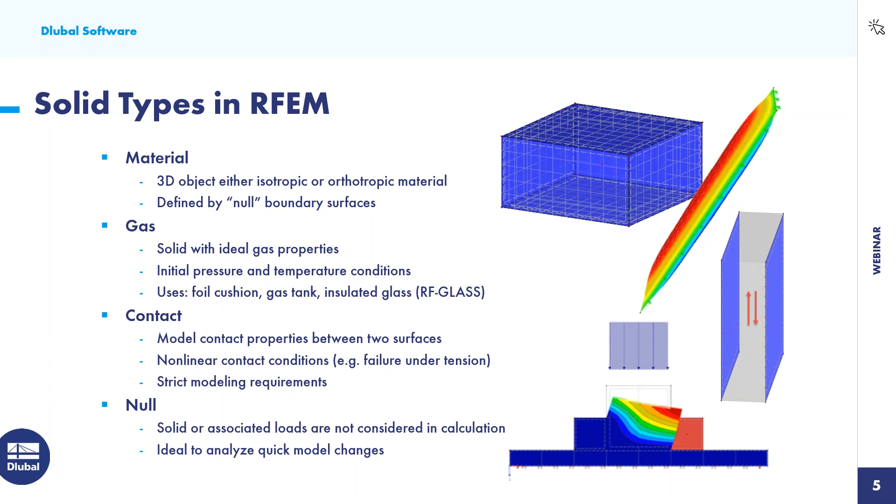The second type is an isotropic nonlinear elastic. Again, you would need RF Mat NL for this material model. This same stress-strain relationship applies for both the unloading and the loading phase for the material. No permanent plastic distortion will occur, though.

Then we also have the isotropic plastic material model. This is where elastic and plastic zones are defined, and the calculation will be carried out iteratively and with multiple load increments. Essentially with this model, if a yield stress is exceeded on a particular finite element mesh point, the modulus of elasticity is immediately reduced. The calculation is rerun until we have full load distribution on the entire structure.

Then we also have orthotropic elastic. This allows us to define elastic stiffnesses separately in all three directions. We might want to use this material model for something like wood or timber.

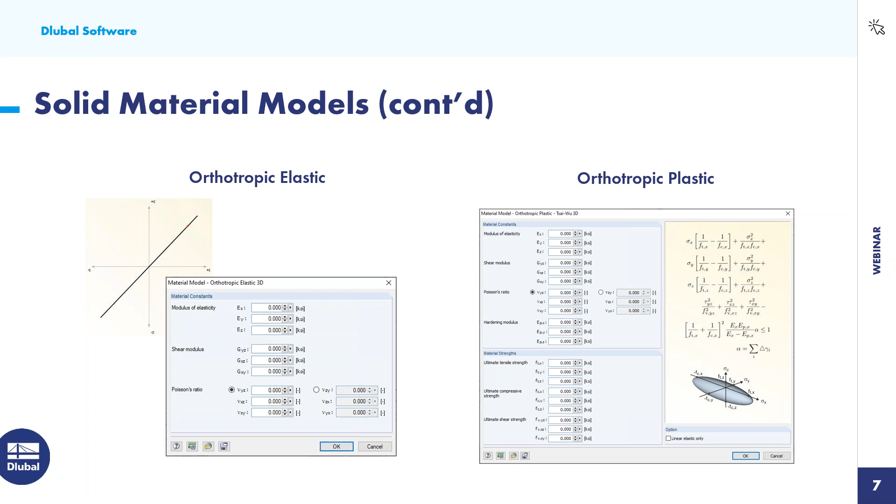Over on the right, we have orthotropic plastic. This utilizes the Tsai-Wu failure theory, and it allows for both plastic and orthotropic properties to be defined in three directions.

All right, so now that we have covered the different solid types and material models, I would like to get started with our first example here within RFEM.

You'll notice that I have a series of line and node elements here, and this model actually comes to us from the firm GP Joule Canada out of Toronto. They use this type of connection here for their solar racking products, and they delivered this file to me as an IGES.

So what I did was File Import. You can see here that we have many different file extensions that we can import directly into the model. We also have some direct interfaces with Tekla, Revit, AutoCAD. These are all default within the main program.

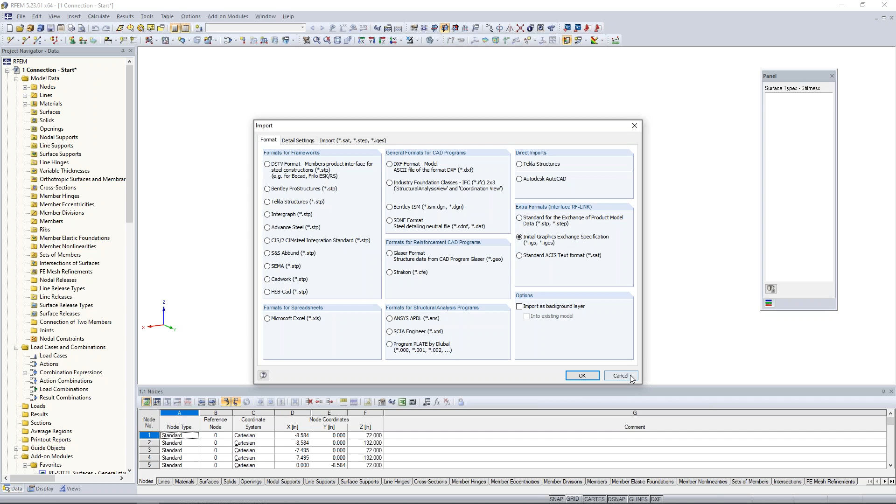If you are trying to import an STP file, a step file, or IGES, you will need to utilize the add-on module RF Link. So for today, we're importing this IGES using RF Link, and essentially what will be brought in are a series of line and node elements to help us model these solid elements.

To begin with, we could probably agree that this is a little bit of an odd connection, not really found as standard in a lot of connection design. So this might flag us that we'd want to do finite element analysis with solid elements to view the various stresses and deformations within this model.

So we'll begin by drawing our first solid here. We can see from these vertical lines as well as the circular lines at the top and the bottom that we want to begin with drawing our first pipe solid.

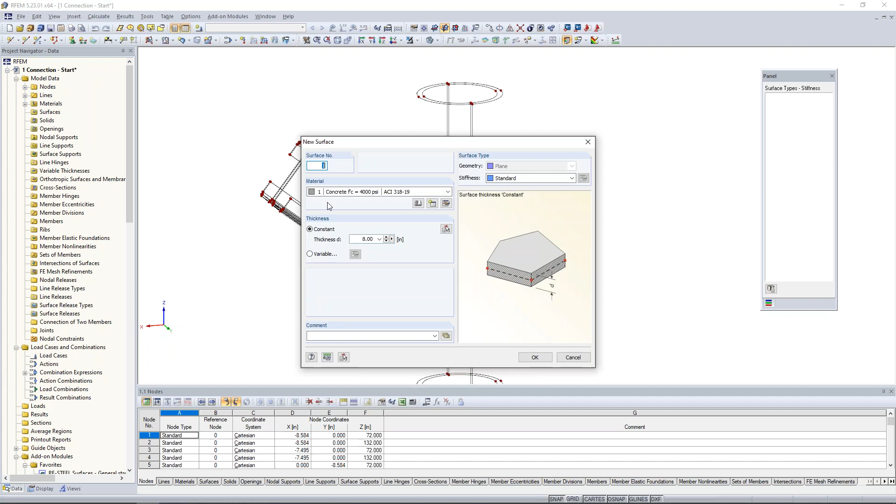I'll go up here to draw a new surface element, and all of these surfaces from this drop down allow us to draw a surface that's in a single plane. We'll choose select boundary lines, and we're going to set the stiffness to null.

If you remember back to the PowerPoint, these null surfaces will define essentially the geometry of what will eventually be a solid element. I click OK, and then I can zoom in here to the top of what will be my pipe element, and I'm just going to select these various line elements here to create my first null surfaces.

Now we'll do the exact same thing on the bottom. I'm just going to zoom in here and select all 4 line elements, and we'll do so on the other side as well. As far as the pipe walls, these are not in a single plane.

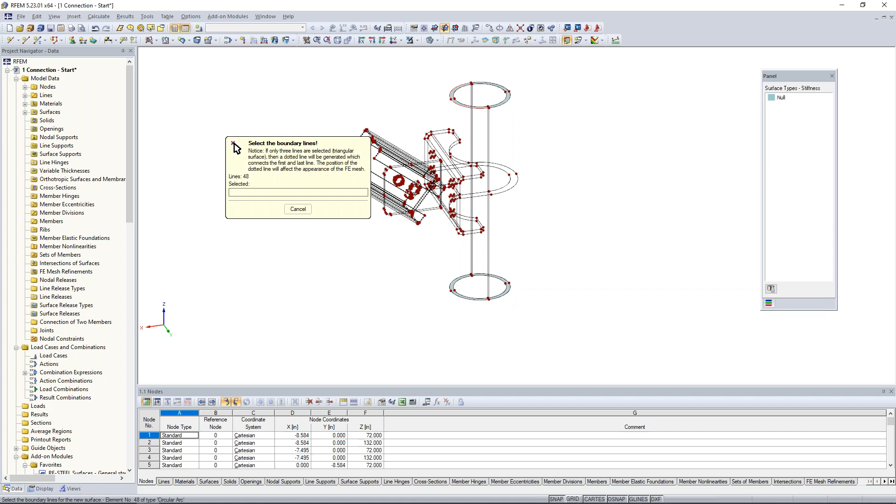So we cannot use this option here to just draw a simple surface, but rather we need to use this tool, a couple over, for a new quadrangle. Now again, the stiffness type is set to null, but this allows us to define surfaces that aren't necessarily in a single plane. So you can see here that I'm going to define my outer wall, and then I'm going to define my inner wall with these 4 simple lines.

Now I can take both of these surfaces here, select them, and utilize my mirror tool.

We can create a copy with the mirror tool. We would mirror about the ZY plane, and then I can simply select any point here within the model that I'd like to mirror about. The coordinates are automatically populated, and now we can see that all of our null surfaces are complete.

So we can define our first solid. Up here in the toolbar, I choose the option New Solid. The solid type will be set to material, so here are those 4 different types we discussed in the PowerPoint. The material will be accessed from the material database.

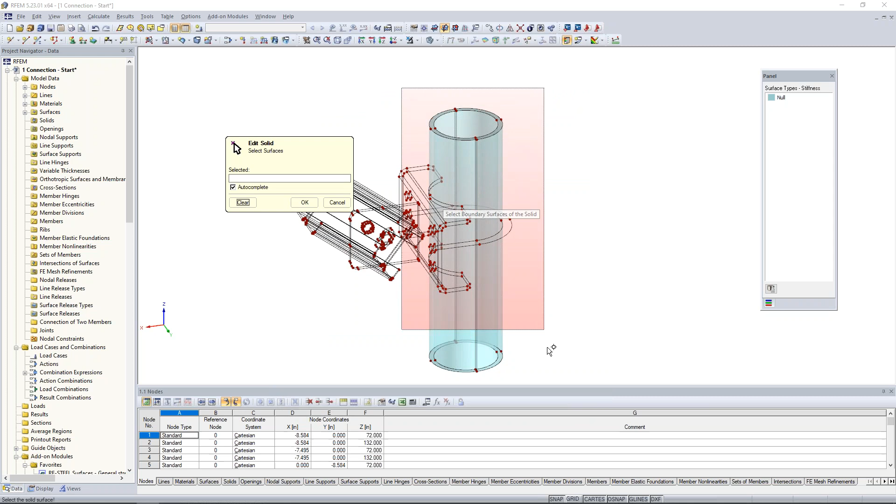I'm going to utilize my filters on the left to choose metal. We'll choose steel, we'll choose ASTM, and we can even take it a step further to choose AISC 360. From here, we would want to choose A53 grade B with the relevant material properties given to us. So I click OK, and then it's really just as easy as graphically selecting these boundary surfaces, surfaces 1 through 8.

Now the other 2 tabs here, the FE mesh allows us to define an FE mesh refinement. We'll actually do this a little bit later on, so we'll leave this unchecked for now. The axes tab will allow us to modify the local axes of the solid. We'll just leave this as the standard default.

So when I click OK, what we'll see is our first solid has been defined, and we can select it right here in the center of all of these null surfaces. So that was a fairly easy solid to define, but what we'd like to move on to is maybe a little bit more complex of an example.

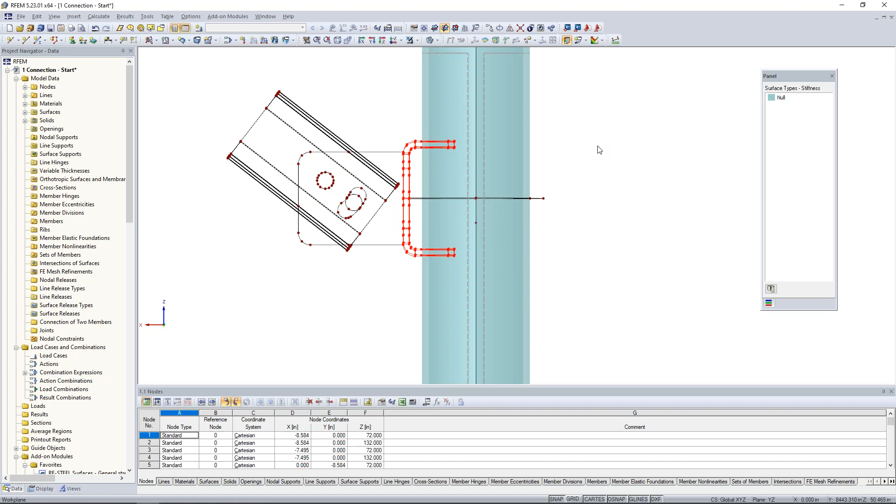So the second solid will be this plate that is essentially resting up against the face of this pipe element. I'm going to select all of my nodes and my lines, and we'll begin by generating those same null surfaces. So I go to my surface option here to select the boundary lines. The stiffness is still set to null. I click OK, and this allows me to move around the model in a circular fashion, and we can rotate the model to generate our first null surface.

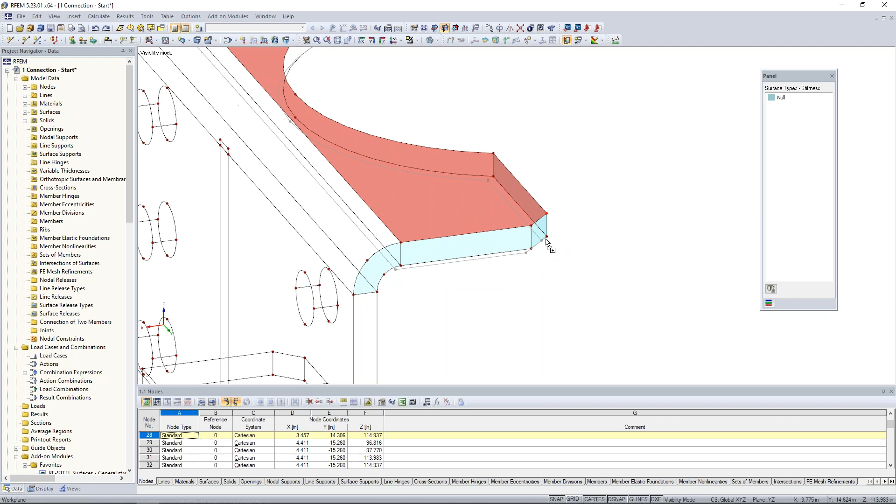And we are done. So this top surface, I need to copy it down to my bottom. So I will highlight it, hold down my control key, and then I can just drag and drop and make a copy. And you can see I'm slightly off there. No worries, we'll hit undo. Can zoom in here, drag and drop, and let's try and snap that to this point here again. So now we have that null surface shown on the bottom.

Now for these curved surfaces, we need to go back to that quadrangle. So I'll choose the quadrangle option here within my toolbar, and then I can easily select the 4 lines to create that first curved surface. And we're also going to do the same thing where our plate transitions from these horizontal elements to the vertical elements, and we need to do so on the back side as well. So those null surfaces are now complete.

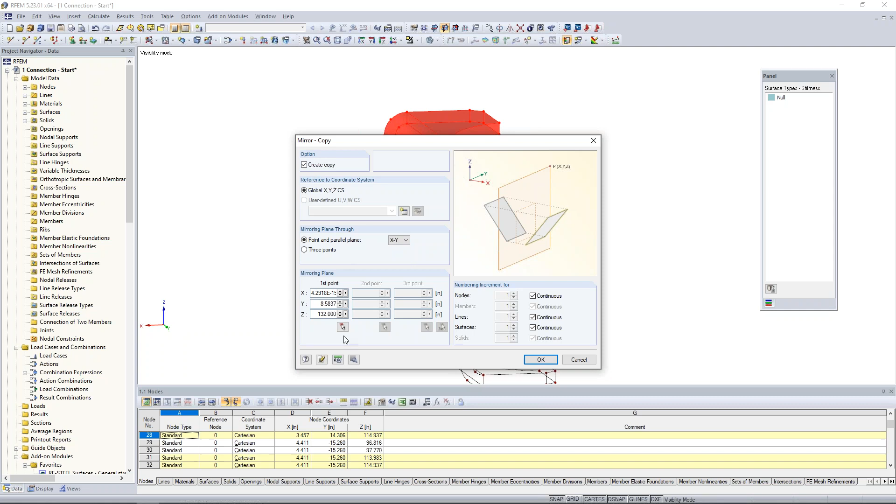Rather than doing that exact same process on the lower half, what I can do is select all of my elements here, and I can once again utilize my mirror tool. We will mirror about the X, Y plane, create a copy, and then I can graphically select my mirroring point. You'll notice the program will snap to one of the midpoints of these vertical lines. So when I click OK, all of those null surfaces are shown at the bottom here as well.

So moving on to the center portion of our steel plate, we can utilize our surfaces in one plane once again, and this is easy enough to select this front face here of my plate element. But you'll also notice that we need to add in some openings. So before I do, let me just add in the side surfaces here.

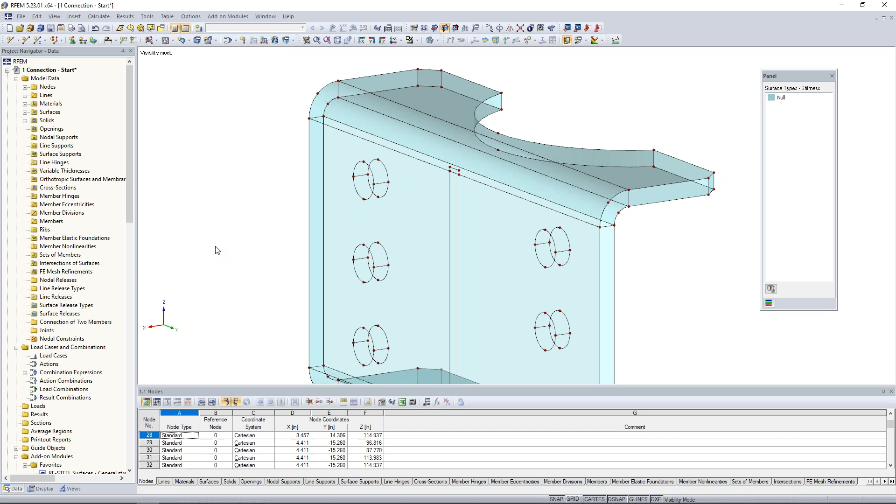To add these openings, we have the option right next to the surfaces to select the boundary lines for an opening as well. So I can easily just select these circular lines, and the program automatically detects that it should add an opening directly within this surface.

So once I have selected all 6 openings for my bolts, I'd like to copy this same surface and the openings to the other side. I'll highlight this surface, then hold down my control key, and select all of the openings. Here's where we can easily hold down our control key, drag and drop to make a copy on the back side as well. Now you'll notice those openings are also on the back of the plate.

Realistically, we think we should be ready to create that second solid. I'm going to go up here, just like the pipe, to create a new solid. The solid type will be set to material, but let's define a new material from our database. This time we will utilize steel A36.

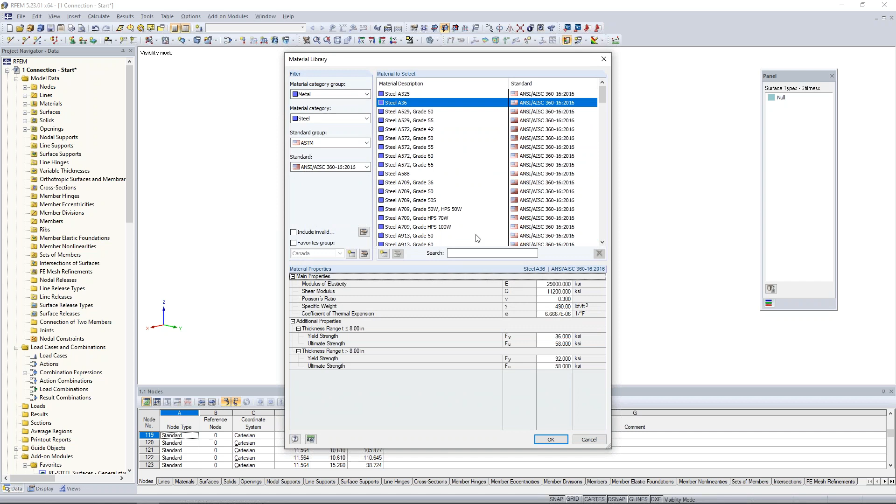I click OK. Now I choose my boundary surfaces, and when I click OK the program automatically gives me a warning saying the surface boundary is not closed at these particular edges. So these are all specific lines. The problem is that we defined these openings, but we didn't close the surfaces here on the interior of the openings. So this would require a new quadrangle surface.

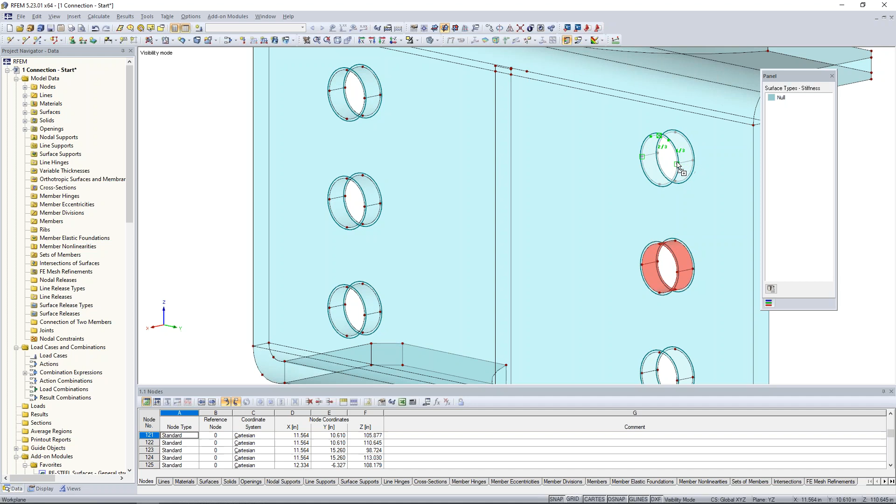We click OK, and we actually need to apply these surfaces on the interior here. Once I apply these 2 surfaces, I have these 2 additional surfaces. I can hold down my control key to drag and drop to these additional openings, and do so on the other side, making sure that our snap points align. Finally, we have one more opening to add here.

The other thing I'm going to do quickly is utilize this tool up here in my toolbar. It's the connect lines or members tool. All that this does is recognize where lines are connecting, nodes are connecting, and we'll go ahead and create an intersecting node there. So let's try and create our solid again.

Solid type material, I'm going to select the steel A36 that I've already defined, and let's select all of our null surfaces here, and click OK. Now you can see that solid was generated just fine once we closed those boundaries, and we have an additional solid shown here.

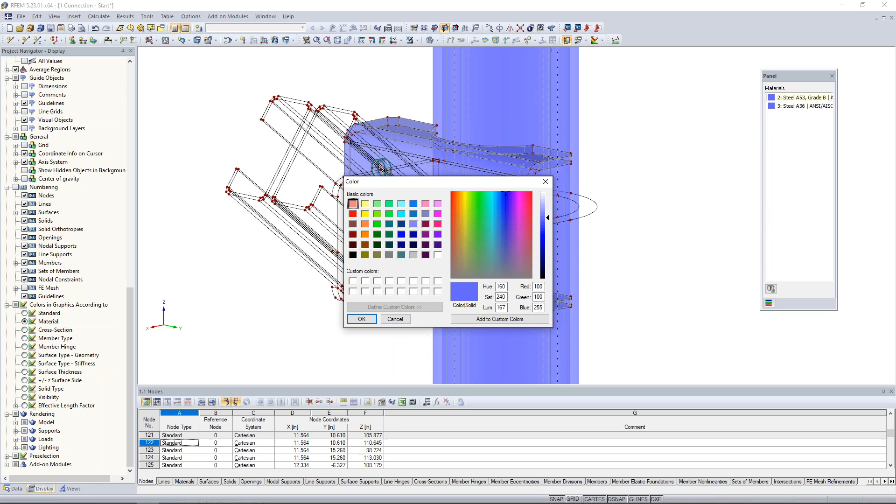So we can cancel this visibility here, and let's take a look at the display of our model according to the material. I'm going to change the color of steel A53 here to a green color just so we can see the difference. Now, here's the problem if we were to continue on modeling the rest of our solids and eventually run an analysis.

If this plate was to press onto this pipe in compression, the plate will actually just pass right through the pipe. The program doesn't detect that these 2 elements are connected, and the reason why is because they do not have a commonly shared surface. So what can we do about this?

I think we can agree the commonly shared surface should be this curved surface here that we created as part of our plate. The reason why the pipe currently does not detect it is just because we need to integrate that surface directly within the solid itself.

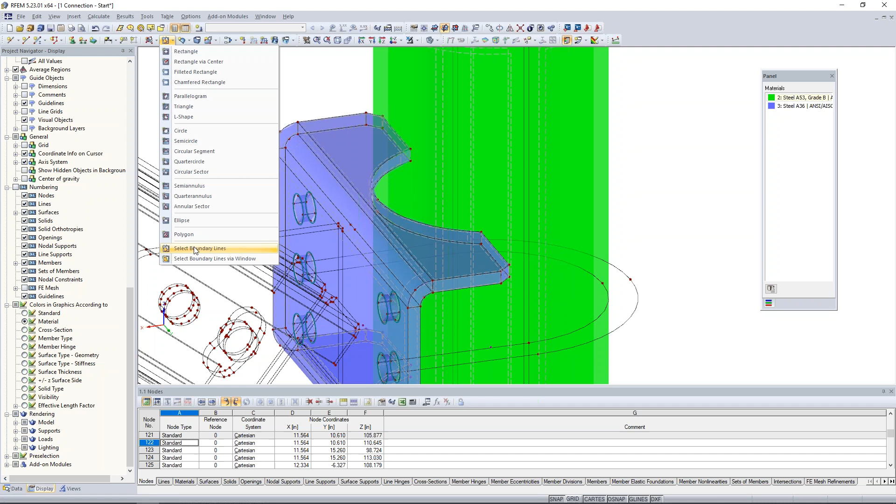So I'll begin by drawing a new opening by selecting the boundary lines. Let me turn this into a wireframe view, and I'm going to select the 4 lines here. I now have an opening symbol shown. Now this surface still exists in the interior of this plate element.

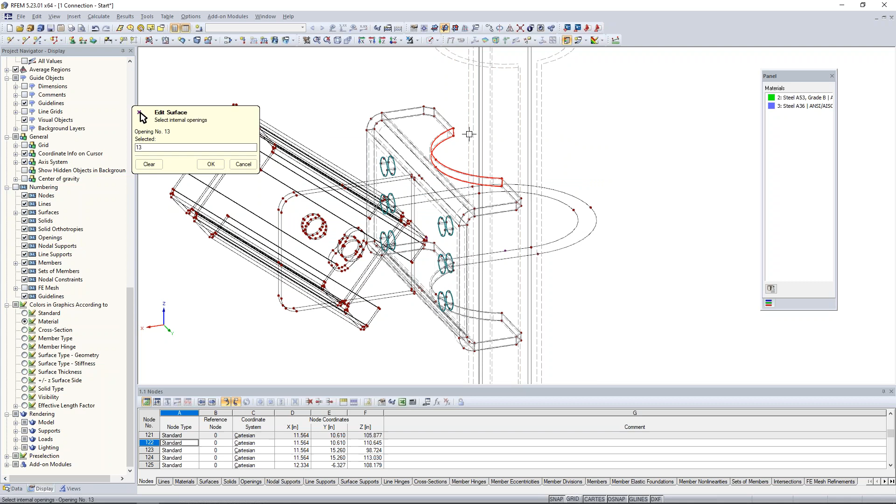So we'll take this a step further, and what we'd like to do is double click - let me back up a step. We'd like to double click on the null surface; remember, this is part of the pipe here. It might be a little easier to see in a rendered view, but we'll change this back to a wireframe view. I'm going to double click on this null surface of the pipe, and under the integrated tab, I need to select this opening and tell the program to integrate this opening directly within this pipe. So we've done that with opening number 13.

Then I'm going to double click on my pipe solid here, and under the boundary surfaces, I want to select that commonly shared curved surface between the plate and the pipe element. Surface number 19 is now listed, so I can click OK.

So now we have integrated that curved surface between both the pipe element and the plate element. So now when they bear on each other, the program will recognize that they're actually connected.

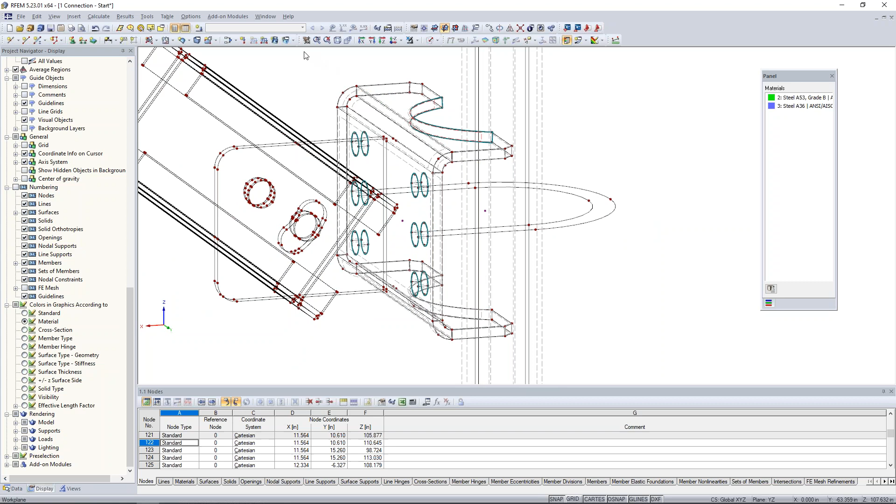We'd also want to do the same thing at the bottom here, and continue on drawing all the rest of our solids. For the sake of time, you'll notice I've continued on with the rest of the model, and I've added in that opening down here at the bottom and integrated that surface to the pipe as well.

We can also access a list of our solids under the Data tab within our Project Navigator. You'll notice I have additional solids now drawn for this U-shaped rod that's essentially tying this plate element around my pipe. We also have the pipe element, and we have the plate that we just created.

Then we have some additional solids, including a solid defined for our bolt on the left. We have maybe a bolt on the right. And then we have some additional solids for the bolts connecting our double channel here to this yellow plate. Eventually this yellow plate connects back to this initial solid that we had just created.

You'll also see that we have solids defined for these channel sections. This is a double channel, representing our diagonal brace in this connection.

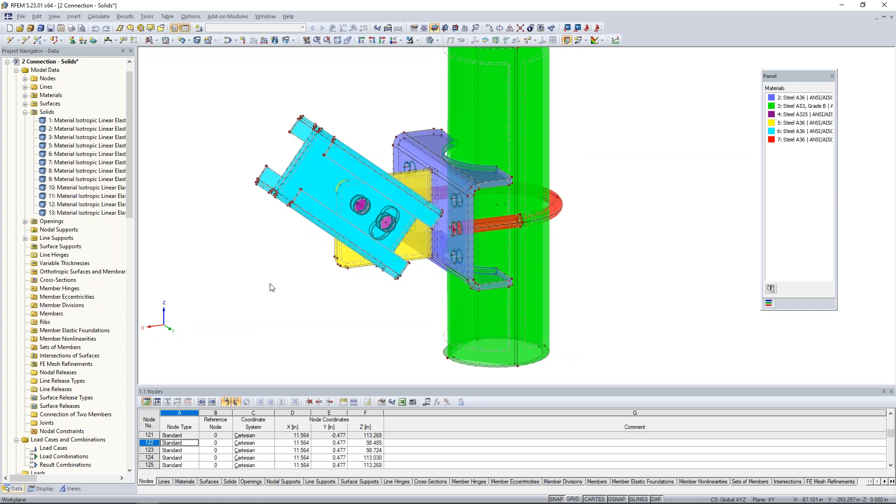So before we're ready to run an analysis, we need to load the structure and we need to support it. Let's begin by supporting it with new line supports. I'm going to access a new line support, and we have a couple default options, both hinged and rigid.

We can always create a new line support, which allows us to define any of the 6 degrees of freedom as fully fixed or fully released. Of course, we have partial fixity and nonlinear options. I'm just going to choose the default hinged option.

I click OK, and we will just select the top and bottom of the pipe element here. So now we have a line support at both the interior and the exterior of this pipe. So it's now supported. We'd like to move on to loading.

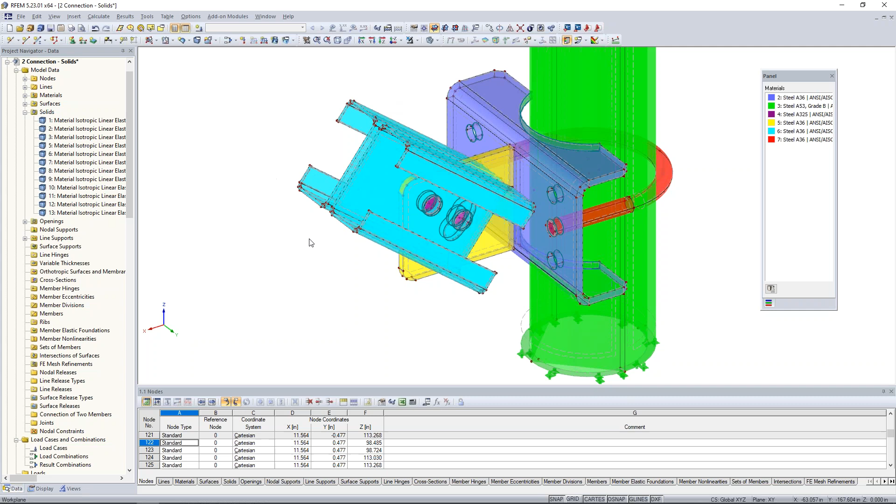With the loading, we probably want to represent some type of load on this diagonal brace, and it's most likely easiest to just simply apply a nodal load. But the problem is that we have all of these null surfaces here. We'd like a point load to really distribute it evenly across this entire face. So how do we do that?

I'm going to select all of these surfaces down here at the end, and I'll create a visibility by the selected objects. Right now, all of these surfaces, if we were to highlight them, we can right-click to edit the surface, and we're actually going to change these from null to rigid stiffness - a very high stiffness, so that eventually when we apply a single point load, it will be distributed evenly across these entire faces. So I click OK here.

But we need to take this a little bit further and actually connect these two faces here as well. So I'll draw an additional rigid surface element between these two channel sections. I'm going to use a new line element, and I'm going to zoom in here to select my point on the left and my point on the right.

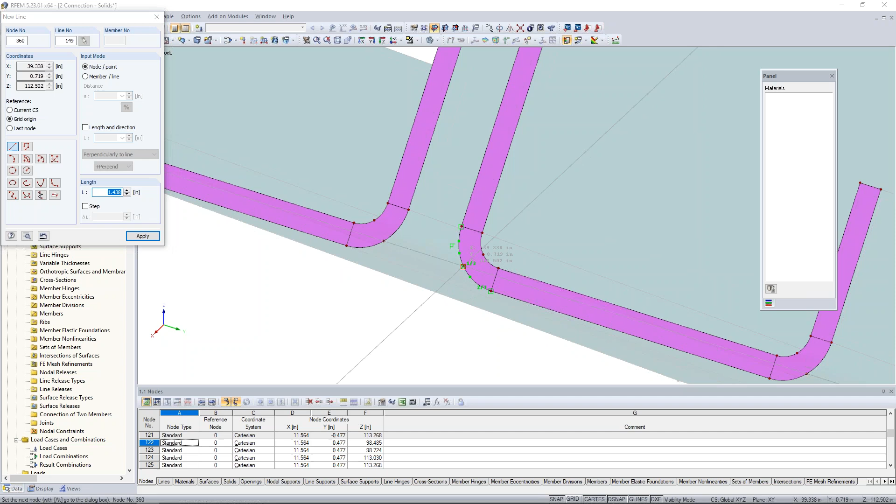We're also going to do the same thing up here at the top. I'm going to select my point on the left and my point on the right. I'm going to utilize this connect lines or members tool once again, just so the program detects where these lines are intersecting these additional surfaces.

And we once again draw a new surface by selecting the boundary lines, but this time the stiffness will be set to rigid instead of null. I'm just going to move around here by selecting these various nodes that make up the boundaries of this rigid surface. So here we are, rigid surfaces connecting both of these channel sections. Now I'd like to create a node right here in the center.

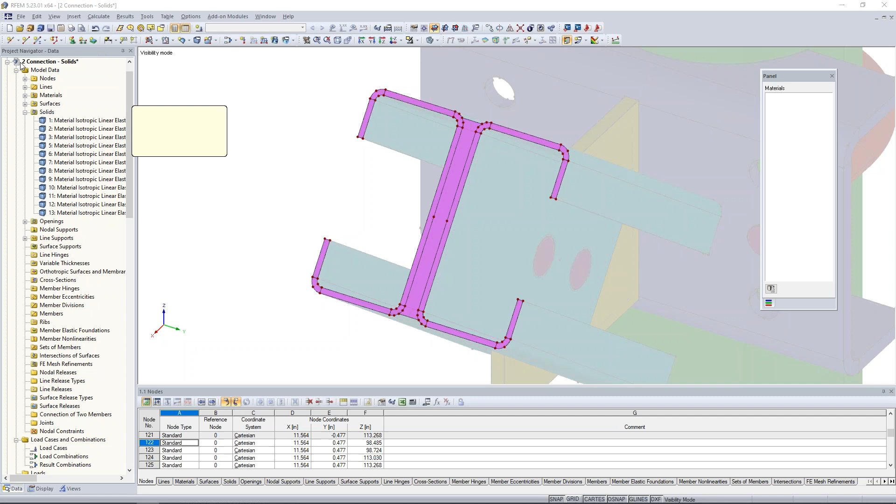So instead of just drawing a new node, we have the ability to draw a node between 2 points. I can select my point on the left, my point on the right, and automatically the program will place a center point here. This is going to be the node that we want to use to load this entire connection.

Before applying a nodal load, we want to generate some load cases. I use this option to create a new load case. The first load case description is 'up', and we're going to place a load that's completely in the vertical direction. Self-weight is activated here. I'll make a copy, and today I'm utilizing load cases rather than load combinations, so I'll activate self-weight since I'm running these separately rather than combining the loads. We'll create one more copy and call this one a tension load.

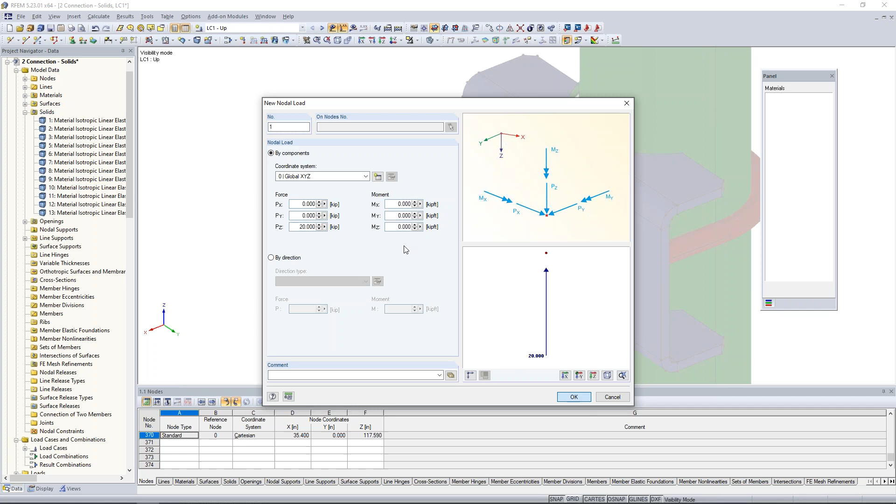Now that we have our load cases defined, I'm going to choose the up direction and apply a new nodal load. Within this dialog box, I'll select the magnitude and enter 20 kips in the vertical global Z direction. I click OK, then zoom in and select the single node, and now we can see our upward load shown here.

Exact same process for down. I'm going to apply a new nodal load. The only thing I want to modify is instead of a positive 20, we apply a negative 20 kips. Just adding a negative sign, we select that center node, and now we have a downward load.

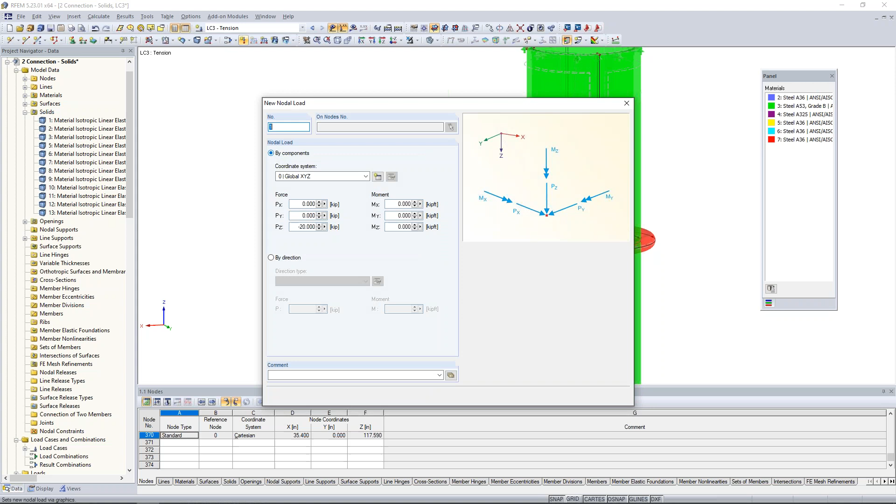For this last load case, this tension load, which is probably the most realistic load, we'd like to apply a tension load along the same orientation as this diagonal brace. When we go to draw a new load, we might think we have to break down this diagonal load into horizontal and vertical components.

But we have a nice feature that allows us to define it by direction. I can go into the detail settings and define this load in the same orientation that a line is defined by selecting it graphically within the model. So I can graphically choose any arbitrary line in the same direction as my member, line 324, and click OK.

I set the magnitude here to be negative 40 kips. I click OK, then scroll in, select that center node again, and now you'll notice we have this diagonal load defined along the length of the diagonal brace. We didn't have to break it up into horizontal and vertical components.

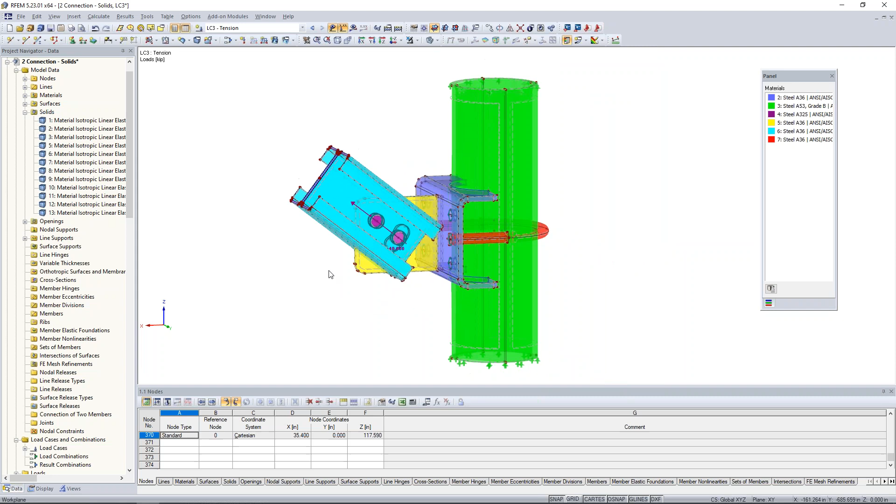We are almost ready to run our calculation. The final thing to discuss is the FE mesh. Under Calculate FE Mesh settings, the default for a new model's global mesh is typically 1 foot, but this is entirely too big for this smaller scale model. So we'd like to change this to 1 inch, and we can select this option to regenerate the FE mesh when we click OK.

We can see in the lower left-hand corner the program thinking through to generate this FE mesh at a 1 inch length. Once completed, the program exits the dialog box, and we can turn on the FE mesh under our display tab. Let's switch to wireframe view, and you'll notice the program has automatically generated this FE mesh, tying all of our nodes and line elements together with the solids. We don't need to take care of anything manually.

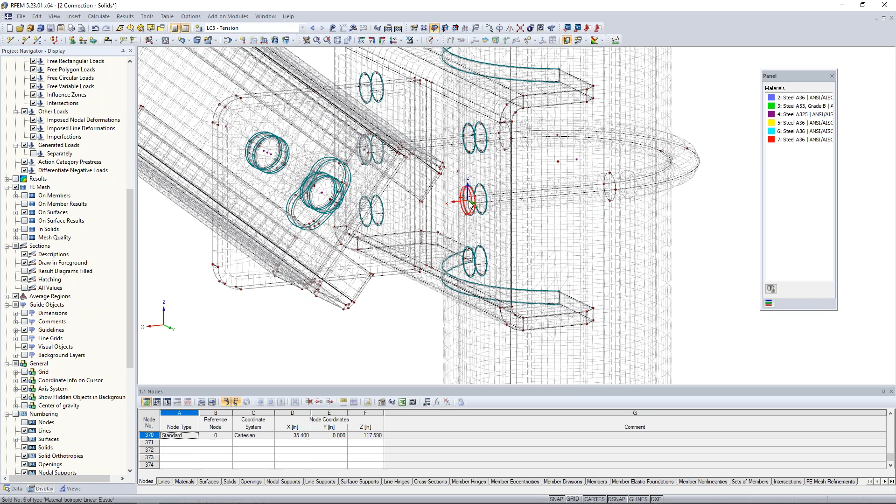Let me take a look at one of these smaller bolt solids, and I'll create a visibility by the selected objects. One thing I notice when zooming in is that there are only 2 FE mesh elements across the entire length. If we're truly interested in the stresses in our bolt elements, we probably want to refine this mesh quite a bit. So I'll cancel visibility mode, and holding down my control key, I can select all of these smaller solid elements.

I'll set my visibility by the selected objects. We can right click to edit the solid, and revisit this FE mesh tab where we can create an FE mesh refinement. A refinement lets me define something smaller than the 1 inch global setting, like 0.3 inches for the entire solid.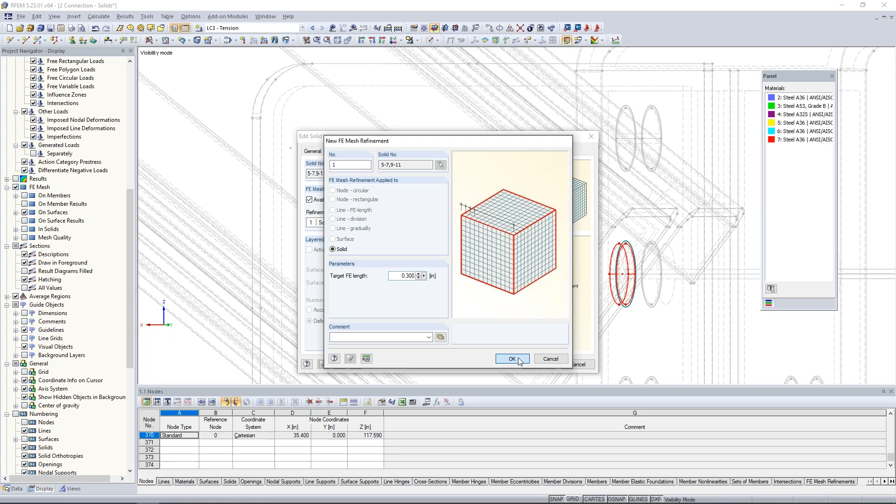In addition to these smaller elements, you can see the FE mesh refinement shown here with this cube type symbol. If I cancel my visibility mode and look back at my pipe element, we can also use FE mesh refinements for larger FE mesh lengths as well. It doesn't necessarily have to refine it into something smaller.

So for this pipe element, I'd actually like to set the target FE length to something like 1.6. This way I'm decreasing my number of mesh elements, which might decrease my solution time as well without compromising my results.

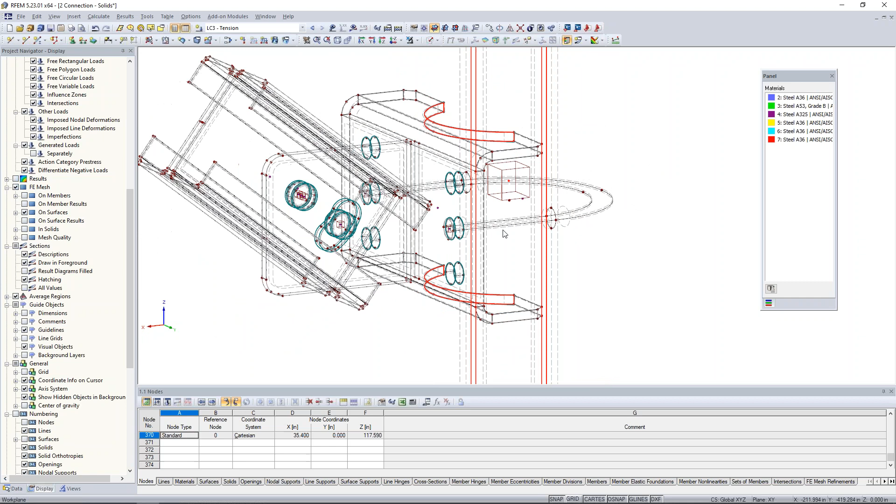If we go to calculate, generate FE mesh, the program will automatically generate this FE mesh again, taking into consideration these FE mesh refinements. It will take just a split second longer because we've defined some smaller FE mesh elements for our bolts, but everything will still tie back into this 1-inch setting.

So here we are with the final FE mesh. We can scroll into these bolts and see there's definitely a smaller length defined. Our pipe has a slightly larger length defined.

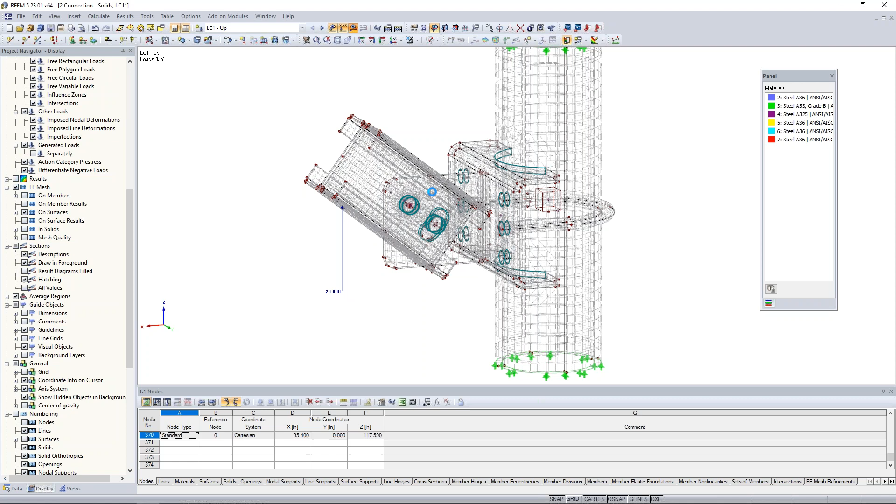Now we're finally ready to run our first load case, and we're actually going to run the load case in the upward direction here. The program gives a quick warning saying you have a lot of FE mesh elements, do you want to change the solver to iterative? I'm actually going to select no with that. This isn't a huge model, so we can keep the default solver as it is.

Now, for this particular load case, everything is linear. Even the load case itself is a linear analysis first order, so it should solve rather quick here and we'll eventually be presented with our results graphically within RFEM. Also, no material nonlinearity shown yet. We'll get into all of those in just a minute.

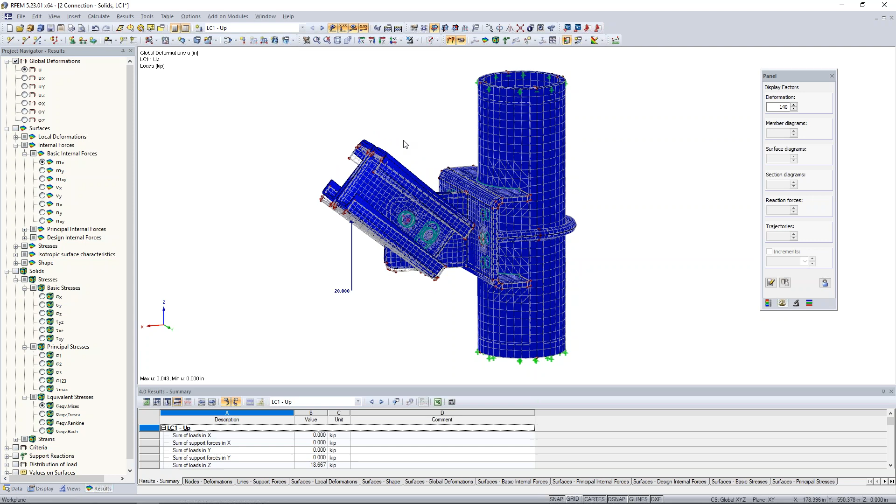Now the calculation is finished, and we're presented with our results here in our project navigator. We're currently viewing the global deformations, and exactly as we would expect, we have our deformation shown here in the upward direction. Sure enough, our braces are deflecting in the vertical direction. But this isn't actually the focus of why I created these upward loads.

I'd rather like to take a look at these elements here, my solids of the plate bearing against the pipe element, as well as the steel rod encompassing the pipe. So I'm going to create a visibility by the selected objects, and right click to turn off the hidden objects in the background. I'd like to still view the global deformation, so I'm going to really increase my deformation factor here.

Obviously we have tension on this plate. And because everything is fully connected here, you'll see this pipe element deformation following along with that plate. Everything is fully fixed. But in reality, we know that this plate is not going to be welded to this pipe. It's actually just sitting there.

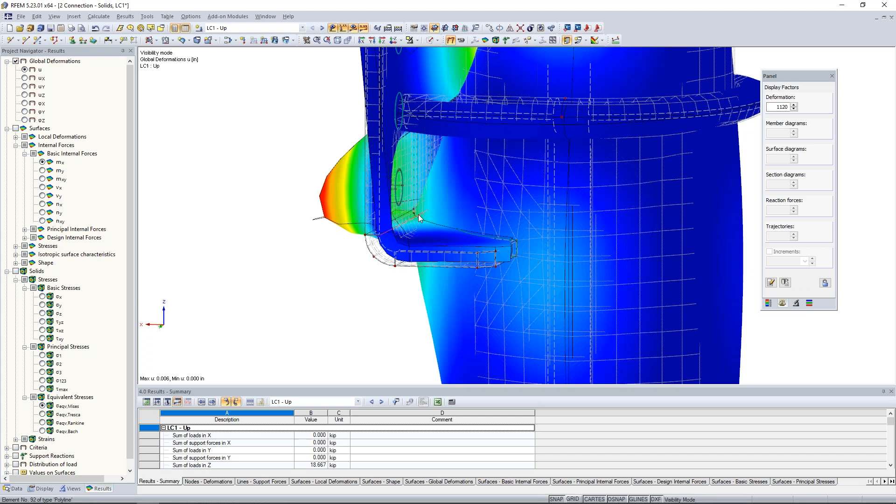So in the event of tension, we'd actually like the full force transmission here to be released. We want this to be a failure between these two elements. But in turn, if we look at the top of the element where we have compression, we certainly want these two elements to bear on one another. We'd like the deflection to follow along with the pipe along with the steel plate. So the question is, how do we define such a nonlinearity as this?

The answer is with what's called a surface release. So what I'm going to do is turn off my results, and under the project navigator, we'll find a new surface release here where we can right click to create a new surface release.

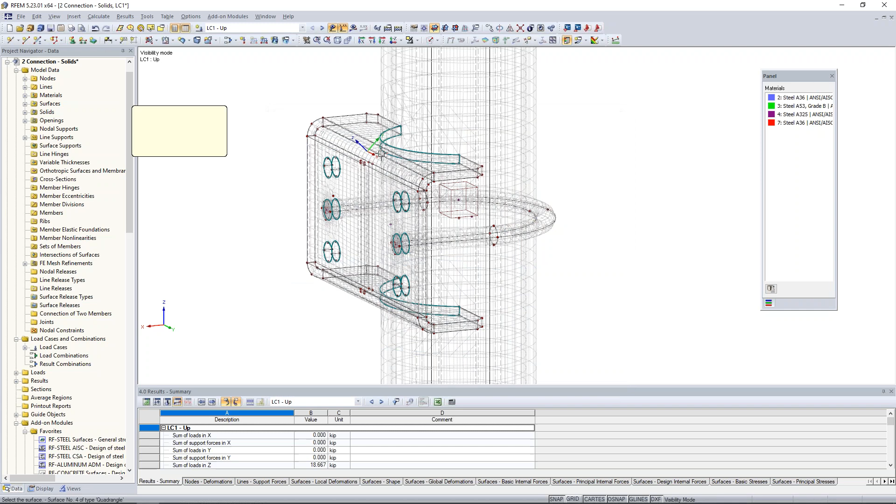The surface we're actually going to use to generate this nonlinearity is that commonly shared curved surface that these two elements share - surface number 15, shown here in the background. We need to create a new surface release type, so I'll create a new type here.

We're going to release the translation in the local z direction of this surface, so it's normal to the face. Under the hood, the program generates a duplicate identical surface, and whatever settings we set, the program will either release the relationship between these surfaces or give full force transmission. In the event of tension we want it to fail, but in compression we want these two surfaces to bear on one another. So we set this to fixed if positive PZ, and click OK.

We want to release solid number 2, and I can graphically select this solid within my model - this is my pipe, solid number 2. I click OK, the program asks me to clear my results, and now we have this surface release symbol shown graphically within the model.

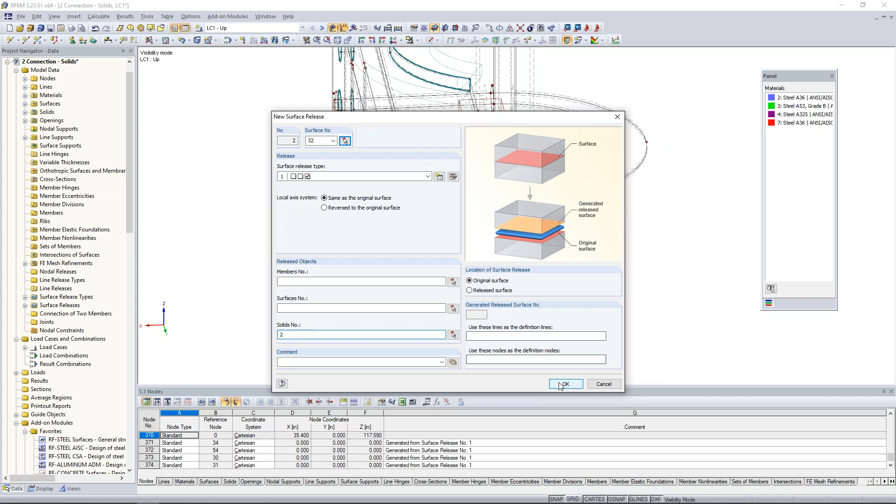The exact same thing needs to be done at the bottom as well, otherwise we have a fully fixed connection. I right click on surface release to create a new one, and graphically select this surface down here, surface number 32. I don't need to redefine the type since we already defined it previously, so I select it from the drop-down box and type in number 2 to release my solid from that surface, then click OK. Now that additional surface release symbol is shown at the bottom as well.

Now what's interesting is to take a look at this line element. If we turn this back to a rendered view, this circular solid rod encompassing this pipe - we know this isn't necessarily a fully fixed connection, but rather maybe we want to define some type of friction behavior between the pipe element and the rod. So I'll create a visibility by the selected objects, and show my hidden objects in the background so we can see where we're at. This line element is shared between this solid rod and this surface, the null surface.

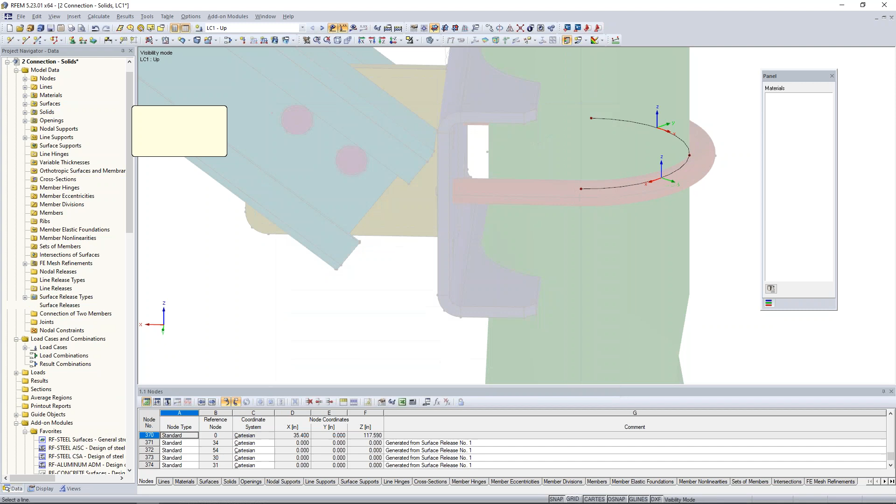I'm going to right click to turn on the local axis system of this line. Just like a surface release, we also have the option to add a new line release from our project navigator - same concept here. We select the line graphically, line number 3, and need to create a new line release type. The program will create a duplicate identical line, and we just need to define the nonlinear behavior here. For this particular option, I'm going to release all of my degrees of freedom.

Notice we have an additional degree of freedom for rotation about the line here. Under my nonlinearities for the local z direction of the line - this is in the vertical direction - I'm going to set the nonlinearity to friction according to the Vy. This means it will take into account the shear force in the y direction, which is essentially the normal force pushing this rod into the pipe.

With this relationship, we can set a spring constant - we'll set this pretty high, 10e6. We also define a friction coefficient between the two elements at 0.8. So the higher the shear force, or normal force acting on this line, the stronger the connection between these two solid elements. Now if we decrease that shear force, that normal force, we're going to see less of a connection, and maybe we'll see that rod slip around the pipe.

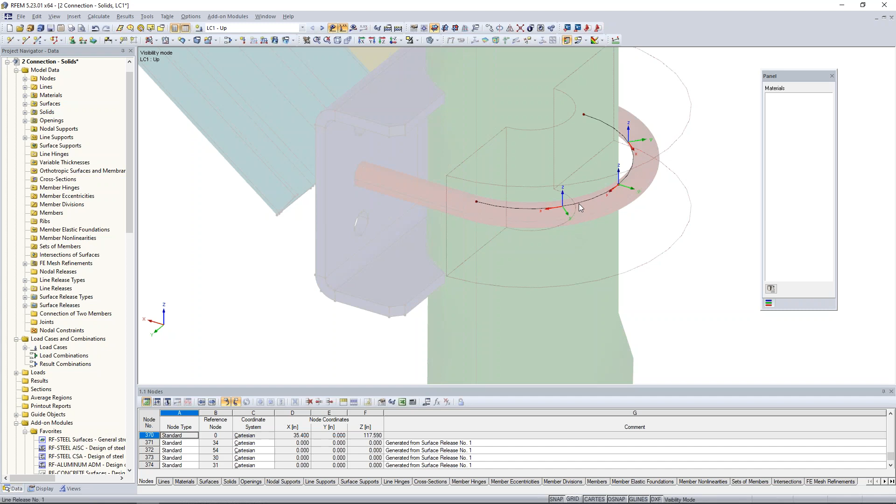Now that we have defined the line release type, we want to release solid number 2. I click OK, and now we have this line release symbol shown graphically, just like with the surface releases.

Canceling this visibility mode, we would now like to rerun this same model in the upward direction, but now accounting for these nonlinearities. For the sake of time, I have actually run all 3 load cases and have the results so we can view the deformation. I'll begin with the overall deformation of the structure with this upward load applied - exactly as we would expect, these braces are deflecting in this vertical direction.

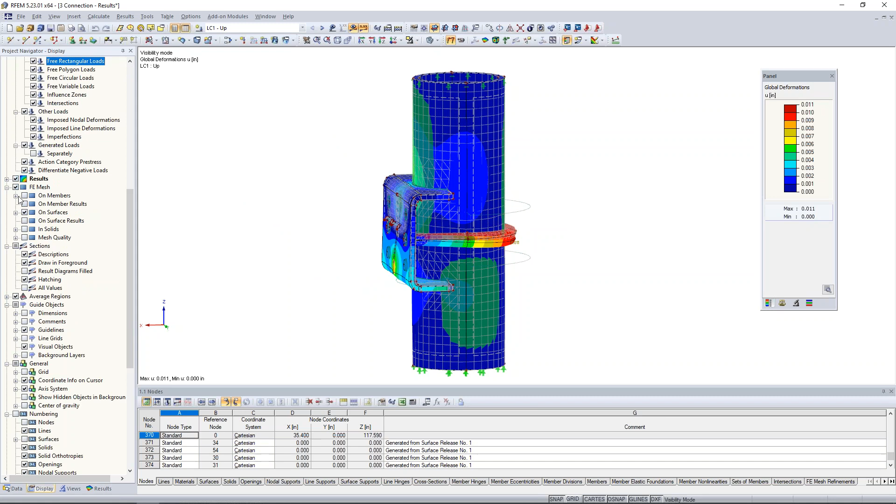What we're more interested in is the behavior we've just redefined on the right-hand side. So I'll select these elements and create a visibility for the selected objects. Under the Display tab, I'm going to turn off my FE mesh, and also completely turn off the underlying model so I'm only viewing the deflected shape.

With the upward direction, I'm going to increase my deformation. Now you can see that as this plate pulls away from the pipe, we actually have a gap here between those two elements. That's because the relationship has failed in tension for that commonly shared surface. But up here at the top, we see the plate bearing into the pipe element, and they're both deflecting together because we have compression. So that's exactly what we'd like to see.

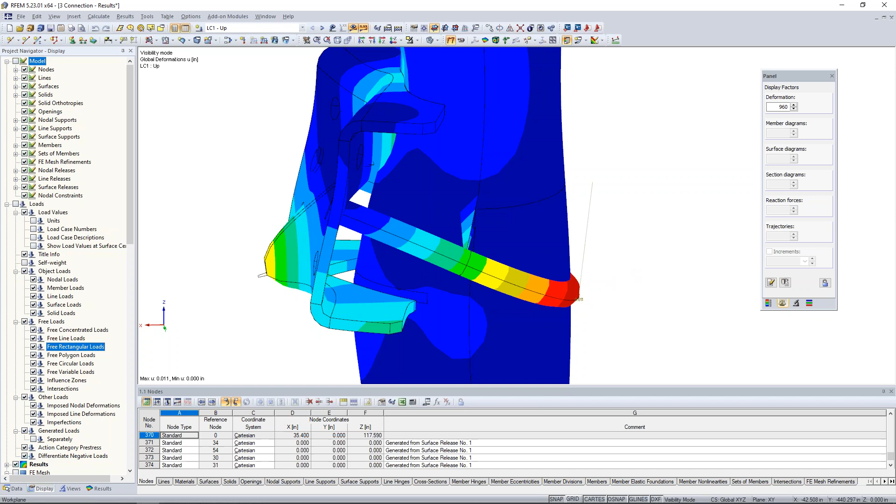You'll also notice my rod is slipping down ever so slightly due to that friction behavior we've defined for that line release. Now my factor is pretty large here - the rod is actually slipping down 0.01 inches, so it's nothing to be too concerned about.

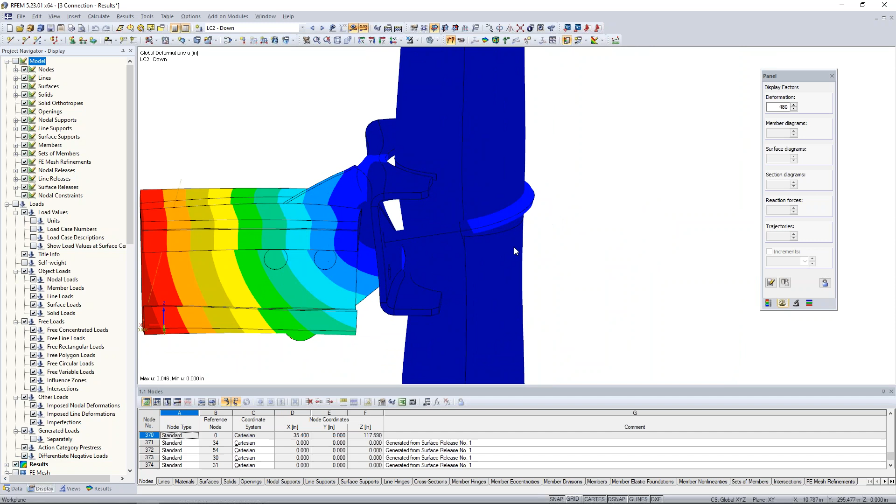If we take a look at the down position - remember, this load is acting down on the braces - I can quickly cancel my visibility mode, and we can see the downward load here. Of course our brace is deflecting in the downward direction. Let's take a look at the deformation factor, and you can see this plate pulling away from this pipe with a small gap in between. We also see this rod slipping up here as well. So this is exactly the behavior we'd like to see defined.

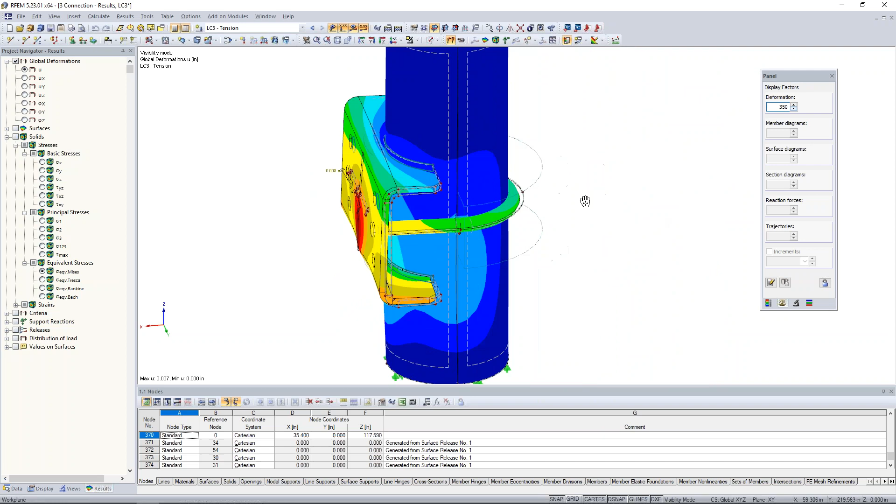Of course, we can take a look at our tension case here. If I cancel the visibility and turn back on my model - remember we just have this load being applied along the same orientation as the members. Taking a look at the results and deformation, I'd like to show you once again what's happening with our relationship here with these elements. You can see that when we turn this into a wireframe view and increase our deformation, we have this plate element pulling away from this pipe. So everything has been correctly defined with these deformations exactly as we would expect - definitely the behavior we'd like to see.

Moving on, the deformation is important to make sure the modeling is acting exactly as we would expect. But we're also interested in information on this model, such as stresses. So I can activate some of my stresses here, such as the normal stresses on my model in both the X and Y directions, as well as the Z direction, because remember, these are three-dimensional elements now.

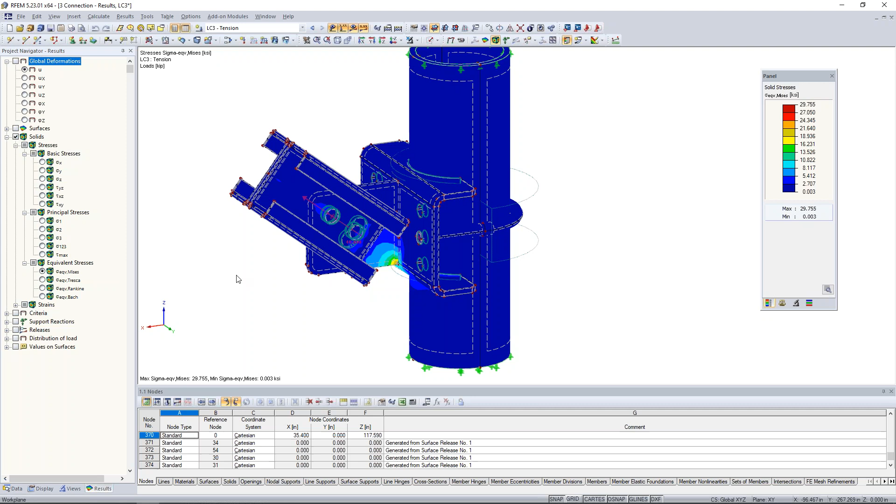We can view the shear forces according to these color panels here. We're probably most interested in the von Mises stresses, so we can activate those and take a view at maybe one of these other load cases, just to see where the hot spots are in this downward load case. Well, we sure have some high stresses here.

Now, a quick tip when we're looking at stresses on a much smaller scale here for something like a connection - you can see the equivalent von Mises stresses are shown at 42 KSI. Under the Display tab, I'd like to activate the FE mesh and take note that under the results here, we have the solids tree. The default is to show the colored contours continuous within the solid, meaning the program creates a smoothing algorithm to tie all the values of our FE mesh points together, giving a nice pretty picture of these various contours.

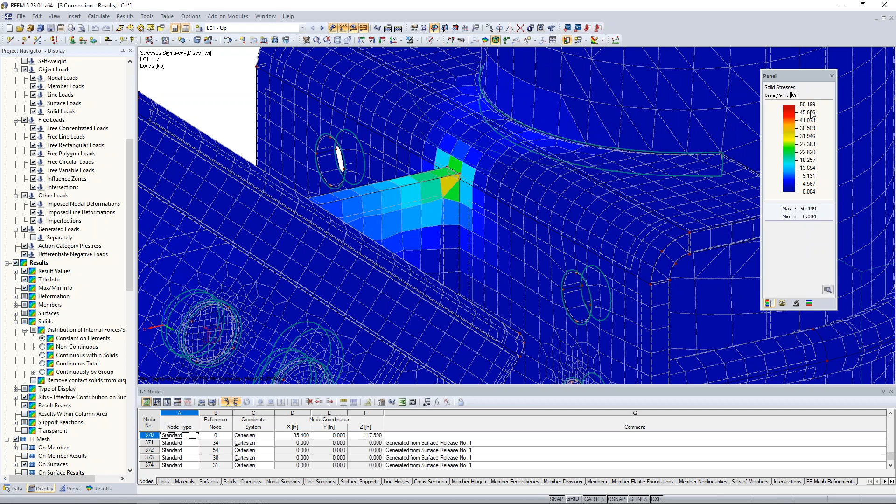The better option when viewing stresses on such a small scale is constant on elements. Now you'll notice every FE mesh element has a specific color - it's no longer trying to tie those all together between each FE mesh element within a single solid. My solid stress actually jumped up to 50.19 KSI. So this is the more accurate way to view these stresses rather than using that smoothing algorithm.

Well, with von Mises stresses this high, I think this would immediately flag us that we probably need to run some type of plastic analysis. Remember, the material for these two plates is A36, so our yield strength is only 36 KSI, yet we have stresses clear up to almost 50.2 KSI. So what we'd like to do now is take advantage of one of those nonlinear material models that we discussed back in the PowerPoint.

Under the Data tab, we can see all of our materials listed within this tree. The first would be the steel A36 from that initial solid we defined at the beginning of the presentation. If I double click on this material, you can see the material model by default is set to linear elastic, and this is where we're going to change it to isotropic plastic 3D.

These various material models for the nonlinear options are available with RF-MAT NL, which simply releases these material models into this main program, RFEM. Now you can see the yield strength by default is set to 36 KSI from our A36 material, based on the von Mises strain hypothesis. So we click OK through these dialog boxes.

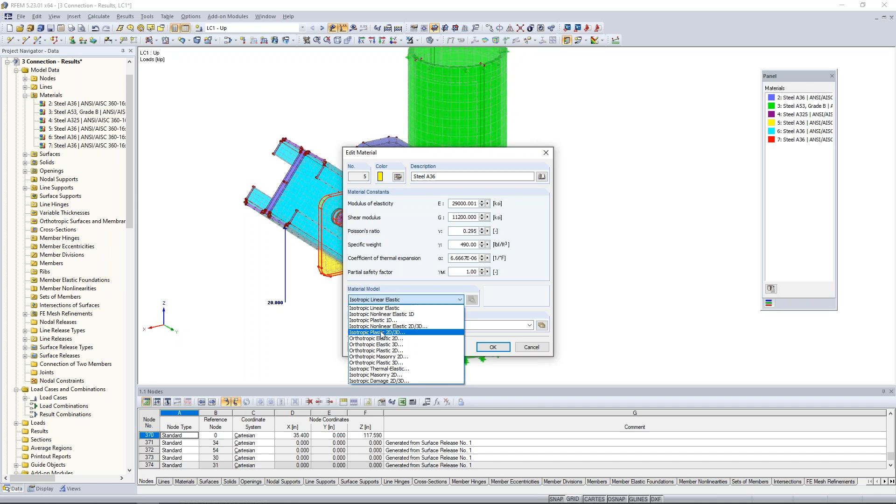The program tells me it needs to clear out the results. That's okay. Now we probably also need to change the material for our additional plate here, since these were both experiencing very high stresses. So I'm going to double click on this material, again steel A36, but we're going to modify this to the plastic 3D option available here.

Yield strength set to 36 KSI, exactly as we would expect. I click OK. Now, realistically, we could change the rest of these materials to a nonlinear material model as well, but the high stresses are really in these two elements, so I'd expect to see better load distribution even with just changing these two elements alone.

So now we'd like to rerun our calculation. And now that we're introducing another nonlinearity, the program takes just a minute to run that calculation. So we will just jump over to an already saved model with the results for us.

So when we run this model according to the nonlinear material, and we also have these nonlinearities defined with the line and surface releases, I want to take a look at my equivalent stresses here again for von Mises. I scroll into these particular areas that I was most concerned about, and I now look at my max solid stress of 34.77 KSI. So this is exactly what we would expect.

We would never want to see with a nonlinear material model anything higher than the yield stress, because what will happen is the load is introduced to these finite element mesh points. If any of them are experiencing stresses higher than the yield strength, the program reduces the modulus of elasticity, distributes the load to the adjacent FE mesh elements, and the calculation is rerun, continuing until the load has been fully distributed within the model.

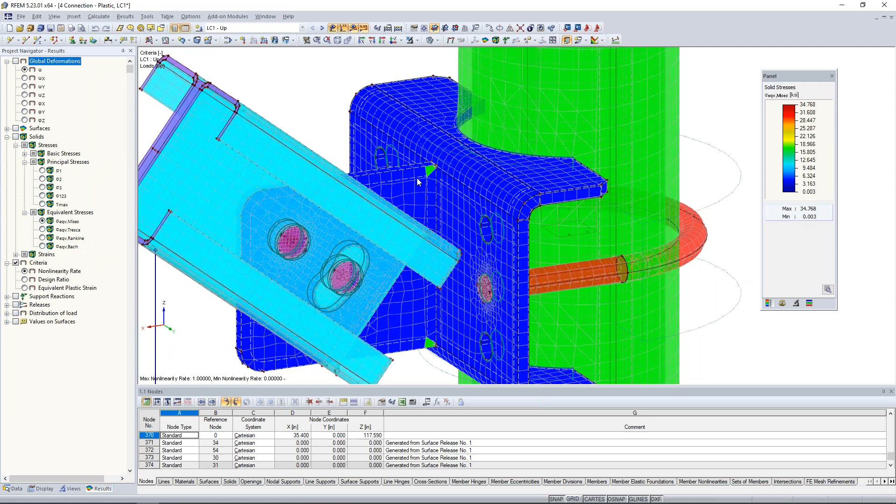So what we're finding here are a few of these elements have probably yielded. And in order to tell if the elements have fully yielded, we can jump to this criteria section here. Turning this back to a wireframe view, the criteria will show us which FE mesh elements have fully yielded or have come very, very close to it.

So with these solid elements, you'll notice it's a little bit difficult to tell what's going on in the interior of these solids. That's because they're three-dimensional, unlike our surfaces or our members. So what I'd suggest when looking at these results is to take advantage of what's called a clipping plane.

Under Insert, we can activate this clipping plane, and it's exactly as it sounds. What it will do is make a slice right through the center of our model here. So we're actually viewing the results right through the center of this plate element, and this just gives us a better idea of which elements may be a concern through the depth of this solid.

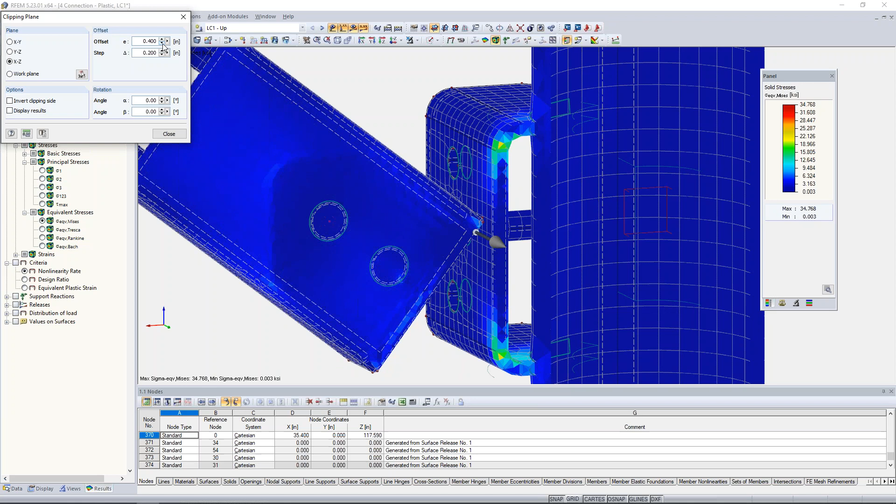We can set our step here to something like 0.2 inches, then use our scroll offset options to scroll through the various views of these solid elements. So I can scroll back to kind of travel through the depths of this plate element. Now we also have the ability to change the plane here, so I can change this to the YZ, and you'll notice I slice through the center of this model.

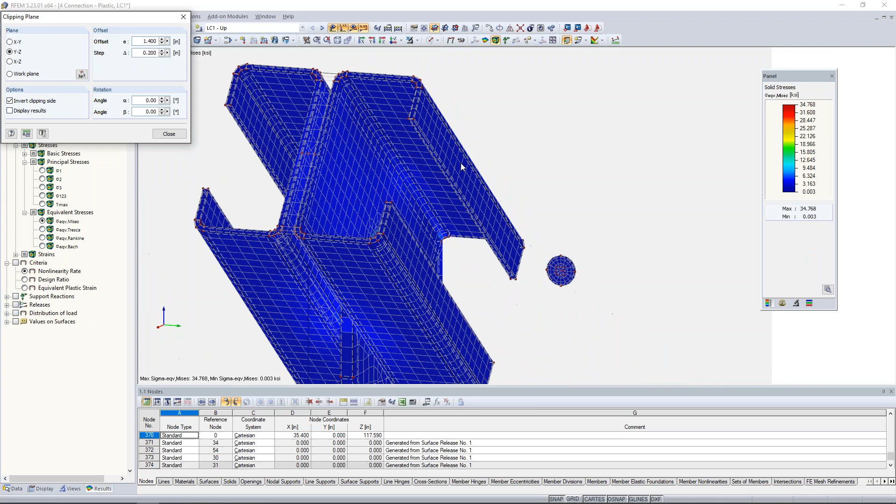I can utilize this scroll wheel here to travel into the depth of where these two solids are connecting essentially. This gives us a better idea using this criteria, the nonlinearity option, of which elements have fully yielded. As we get closer here to our initial plate, we'll see some of those yielded elements. We also have the ability to quickly invert the clipping plane, so when I choose this option, I'm now looking at the other side of the model. We can travel through there with these offset options. That clipping plane can be extremely beneficial when you're utilizing these 3D solids, and it can be a little bit more difficult to see.

Okay, so we have really covered quite a bit in terms of these material solids and nonlinearities. The next thing I'd like to show you is how to activate a null solid. We might think of using a null solid for this particular connection if we're told that this diagonal brace isn't going to be a double channel section, but rather just a single channel, so we'd like to get rid completely of one of these channel elements.

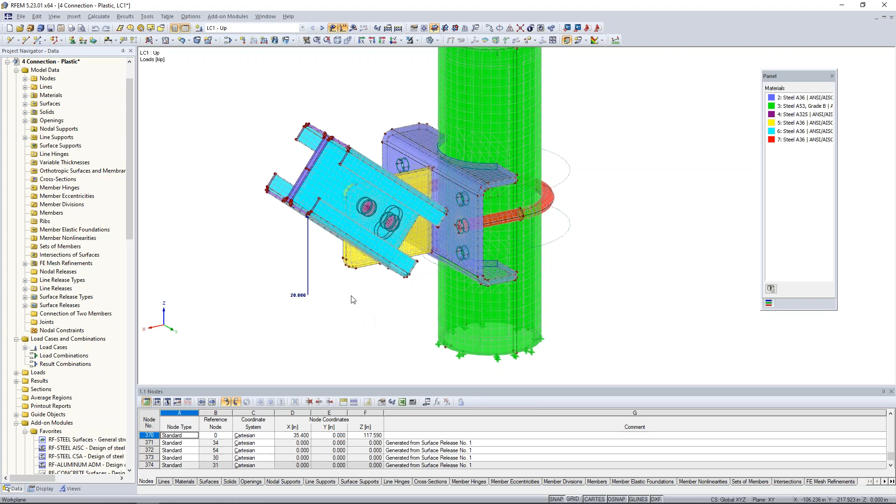Of course, we can go in here and delete the geometry, but instead I'm going to double click on my right solid here and change the solid type to null. I click OK, so we clear our results here, and you'll notice the program automatically modifies the color to this red. That just means this channel was completely taken out of the model, and all associated loads will also be taken out of the model for our next calculation.

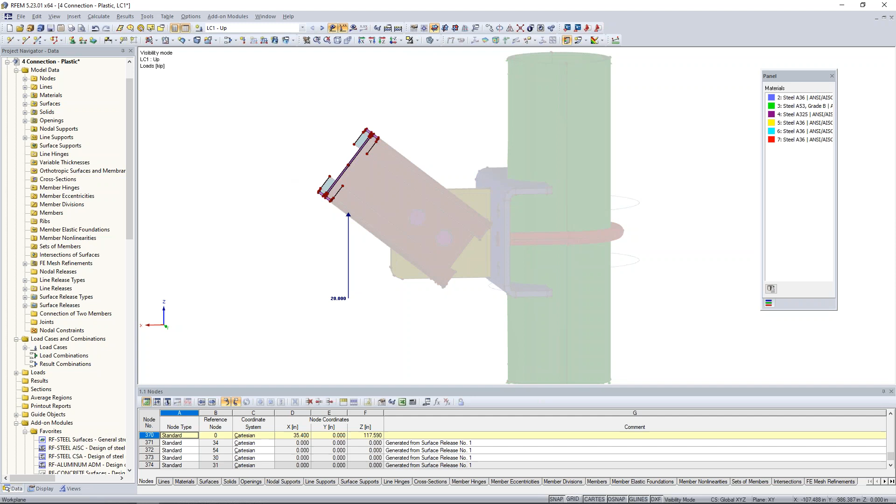Before we run that calculation, we need to modify what's going on at the front here, because we created all those rigid surfaces to distribute the load evenly. So I create a visibility by the selected objects. My rigid surfaces on the right weren't automatically changed to null surfaces either, so we can select them all with our selection tool, right click to edit the surface, and similarly to the solid, we change these rigid surfaces to null. I click OK, so now all of these surfaces and this solid on the right have been completely deactivated.

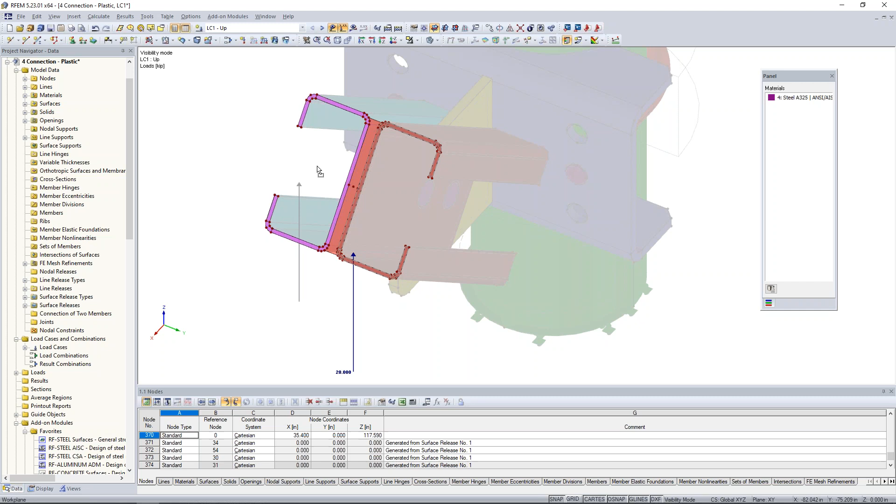The final thing to do is modify where we're applying this load. Currently it's applied to this node that's no longer active on that surface. So let's take this load and simply drag and drop it. Let me zoom in here a little closer. We'll take this load and drag and drop it onto this node on the left, so now it will be evenly distributed to the face of this channel section shown on the left.

Same thing for the downward load. I'm going to zoom in. I can just grab this load here, drag and drop it, and snap it to this new node point. And finally we have this tension load, same concept - I would just drag and drop it to this new node over on the left. So now we're ready to run our analysis again.

Maybe we want to change the materials back to linear, or maybe we keep them as nonlinear, whatever you prefer. So we rerun that calculation, and once again I will jump to an already saved model. Let's take a look at this upward load case and turn on our results. We're currently viewing the global deformations here.

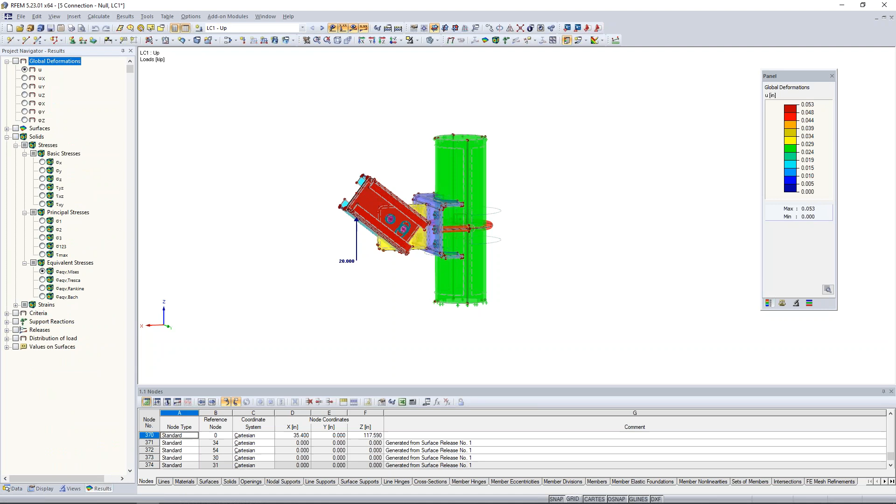Let me turn these on. I will turn off the model in the background completely. And now you can see that although that channel section still exists on the right-hand side, we've set it to null - it's completely taken out of the calculation. We can rerun this entire connection with only a single channel shown.

But in the event we need to reactivate that solid again, all we need to do is change the solid type back to a standard element instead of null, and then maybe modify these loads slightly, and then you can rerun it with the double section shown. So that's a great example of how we can use that null solid option. All right, so that obviously makes up a bulk majority of our example today.

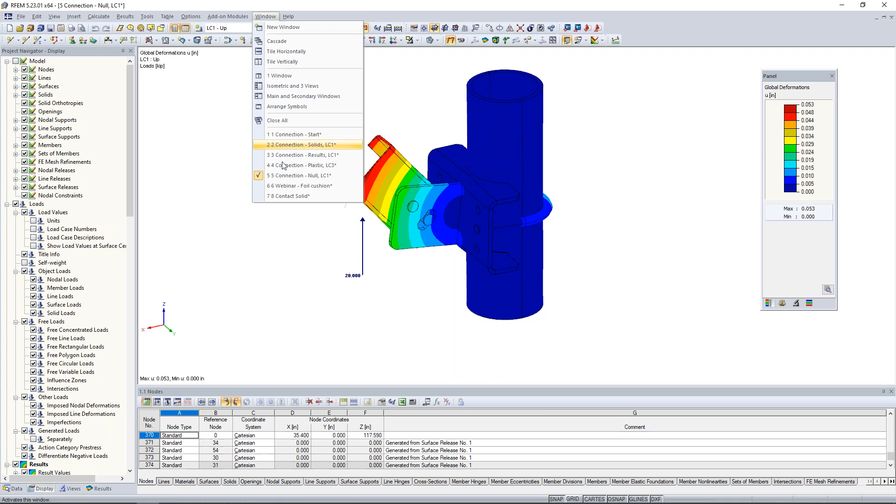I want to touch on a couple of other solid types before the end of the presentation today. We'll jump to another model, an example of a solid gas element. You can see this is an inflated foil cushion, typically used on roof elements. This element is quite large, 40 feet in length and 13 feet in width.

The elements have already been defined here, and I'll preface this by saying one of my colleagues did a webinar completely devoted to this foil cushion and utilizing our form finding add-on module. You can refer to our YouTube channel to view a webinar that goes much more in depth than what I have time to show today.

We have a surface element at the top here, and our stiffness cannot be set to a null stiffness when we're defining a gas solid. The gas must be encompassed by some type of element. So for this, we have a fabric membrane defined with a membrane orthotropic material.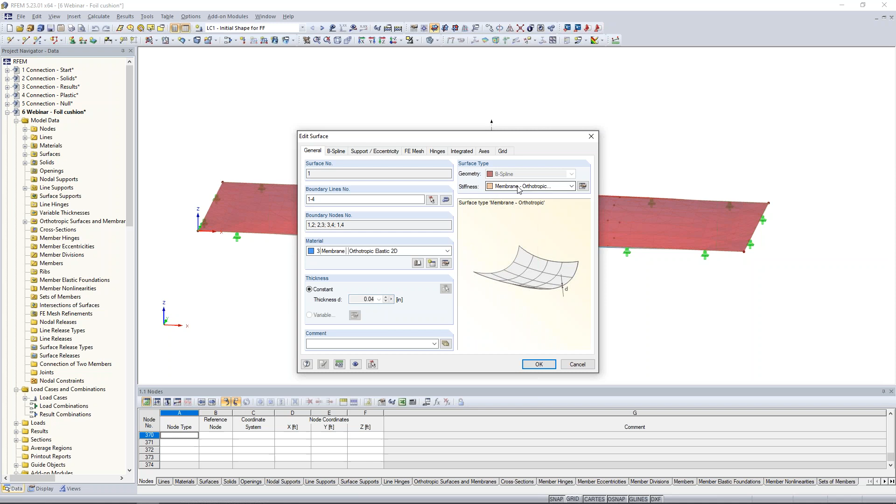We're also utilizing our form finding module, used for tensile fabric structures. We can apply a pre-stress force, and the program will utilize this add-on module to find the relevant shape based on these pre-stress forces. That's the surface defined on top. Exact same concept for the surface on the bottom, another membrane orthotropic surface defined.

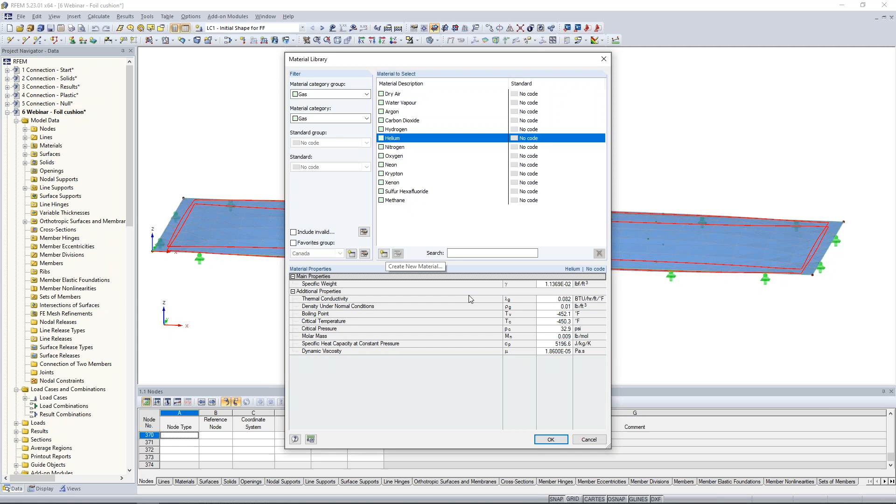Now, what's interesting is if we take a look here, we have our solid already defined, and this time the solid type is set to gas. The material comes from our material database, and instead of filtering to steel, for example, we filter to gas. We have all the relevant gases along with their gas properties shown in this table that you can select from, or you can create your own. In this case, we're using dry air.

The second tab is where we'll set the initial atmospheric pressure of 14.5 psi. The initial temperature is set at 74 degrees Fahrenheit. So that really makes up the solid definition here.

Before we run this first load case to find the fabric form finding shape, I also want to point out that a solid load has been applied to this model as well. We can add a new solid load from this drop down. Double clicking on it graphically, you'll see that a solid load can be defined with the load type gas, with a resulting overpressure, and then we apply the magnitude of 6.25 psf to the interior of these fabric membranes.

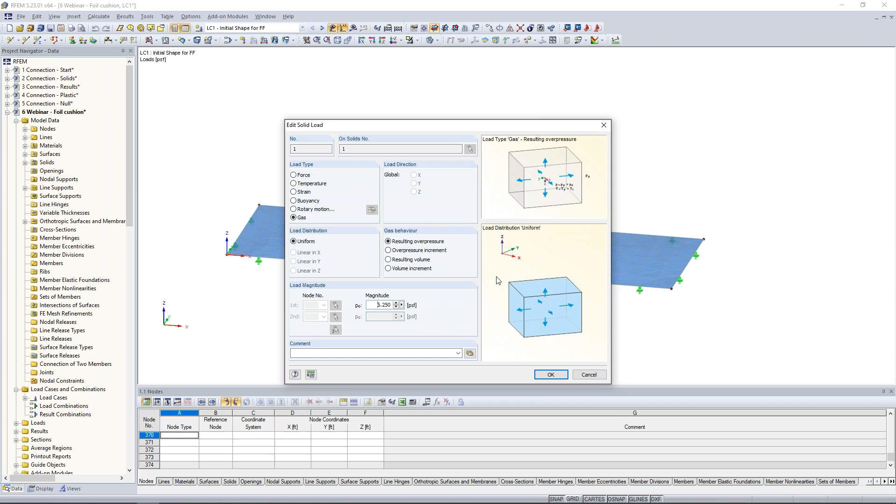So when we run our analysis, we'll consider the form finding shape from the pre-stresses, as well as the solid gas and the solid gas load altogether. Initially we can view the contour lines of the shape just to see the nice contours we'd see with this inflated foil cushion.

But we're probably also interested in information such as our solid pressure. We can view the overpressure, for example. Gas volume is given to us here, as well as the temperature, but the temperature is just going to be that 74 degrees we initially set it as.

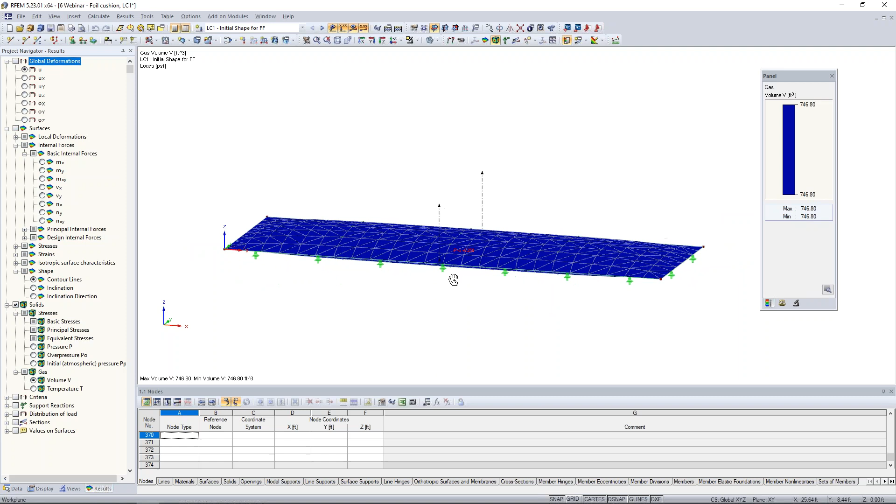With these foil cushions, this initial load case is interesting, but we probably also know it's going to be presented with additional loading scenarios, such as snow load on a roof. So in this second load case, we also add a 10 psf snow load. When we rerun this calculation, we'll now consider this area load on top of these fabric membranes.

We've also applied an additional solid load in the interior here, a little bit higher than what we saw with that initial load case. Now when we look at our results for the global deformations, we're seeing the downward deflection of our entire system.

What's important to note is that without this gas solid defined, if we applied an area load, it would just be applied to the fabric membrane on top, and probably pass right through the bottom fabric membrane. But as we have it defined now, with this interior solid with gas properties, both elements are actually deflecting together. Quite powerful, again, in how we can use a gas type solid.

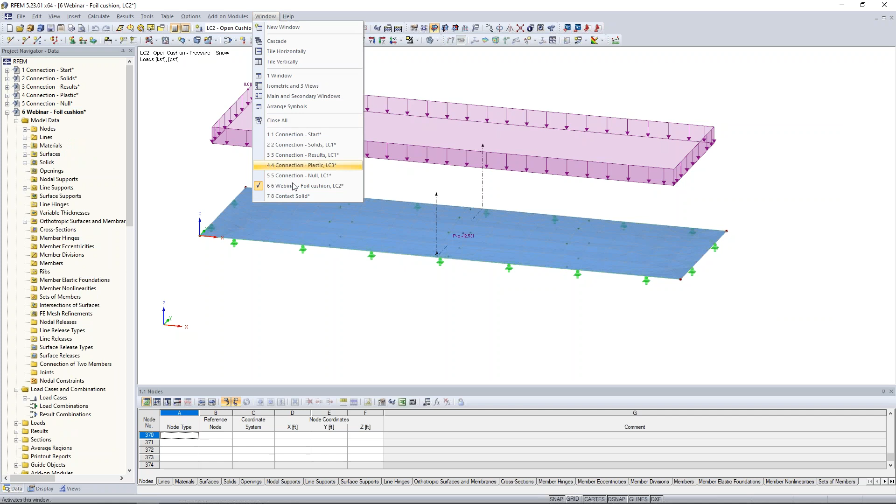The final example for today is a contact solid. For the sake of time, since we're almost out, I don't have the ability to model this one from scratch. I do have a previous webinar where I model a very similar beam splice application from scratch, so shoot us an email after the presentation and I can point you to that. But I just want to give a quick overview of this contact solid.

So again, this is a beam splice. On the left-hand side we have an HSS 16 by 8 with 0.5-inch thick walls defined. These are all defined with surface elements, so you can see the relative material defined here, and the relevant wall thickness for these surfaces.

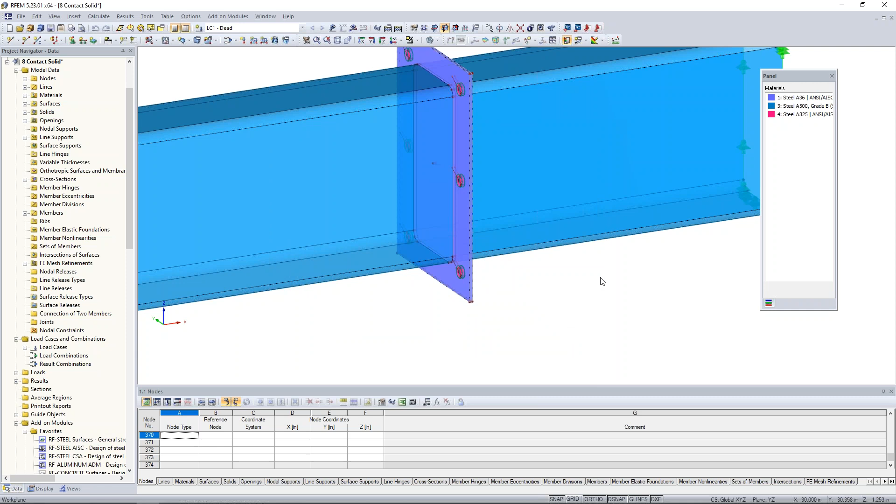It's also attached to a steel plate here, and this steel plate is standard stiffness with steel A36 defined, with thickness set at 0.25 inches. On the right-hand side we have the exact same setup for an HSS member, with its own steel plate defined, also 0.25 inches thick.

So in between these two steel plates is where we would define our contact solid. Let me go to a wireframe view, and I can double click on my solid that exists between these two surface elements. You can see the solid type is set to contact.

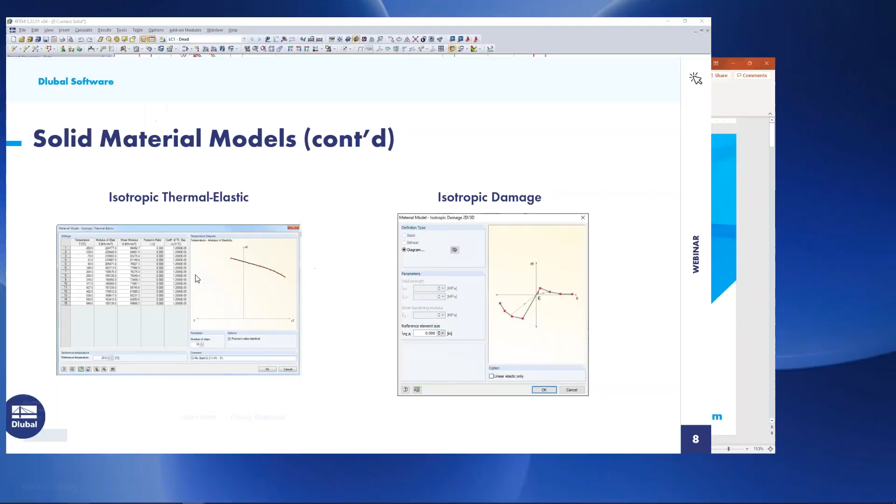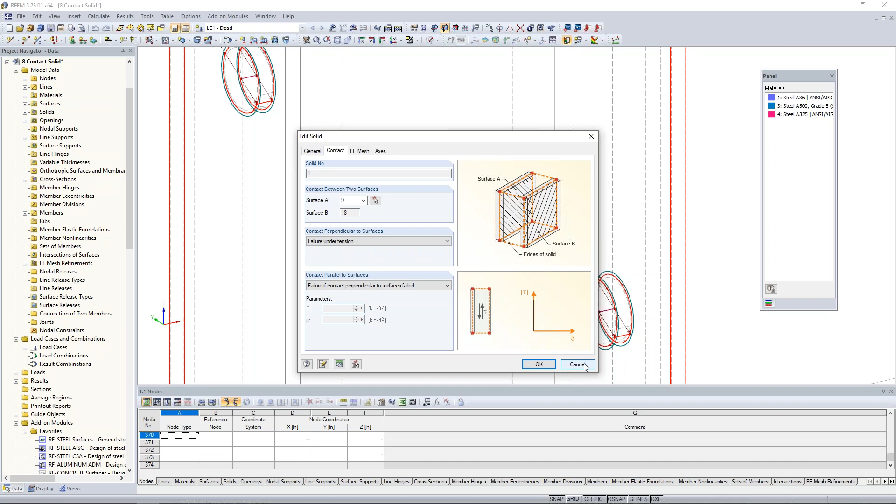Once this contact solid is defined, a couple other things to note: the exact depth of this contact solid is really important. I can use my measure tool to measure the depth of this solid between the two surfaces, and it's 0.25 inches. The exact depth should be half the thickness of surface A plus half the thickness of surface B. In my case, both surfaces of these plates were 0.25 inches, so my contact solid should be 0.25 inches. That's really important in order to replicate these surfaces essentially lying flat against each other.

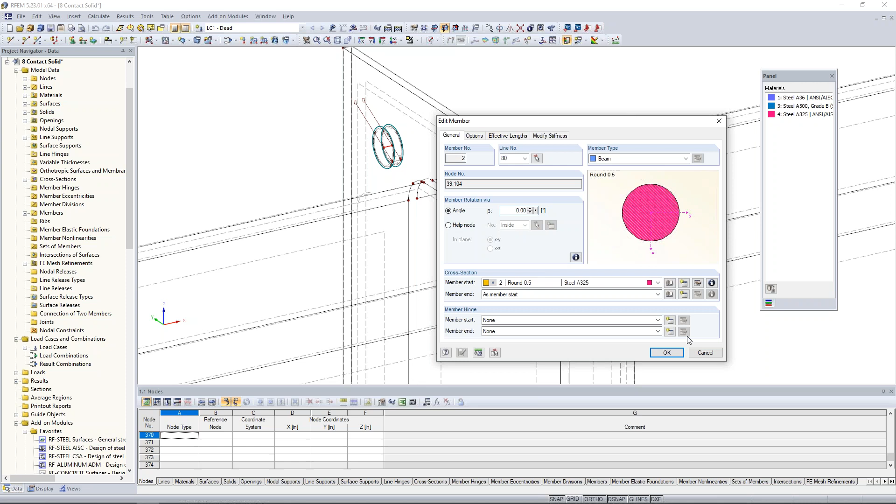Now, the other final thing to note is that these plates are going to fail in tension, so we need something to hold them together. I've modeled some typical member elements here as beams, and these are just circular steel sections with a 0.5-inch diameter to represent my bolts.

So these bolts should take over on tension when the plate elements fail. We can apply our first load case, which you can see is some simple line loads along the walls of this HSS member. When we view the deformation, we should see some strange behavior at the bottom. To help clarify what's going on, under the display tab we can activate this option to remove contact solids from display.

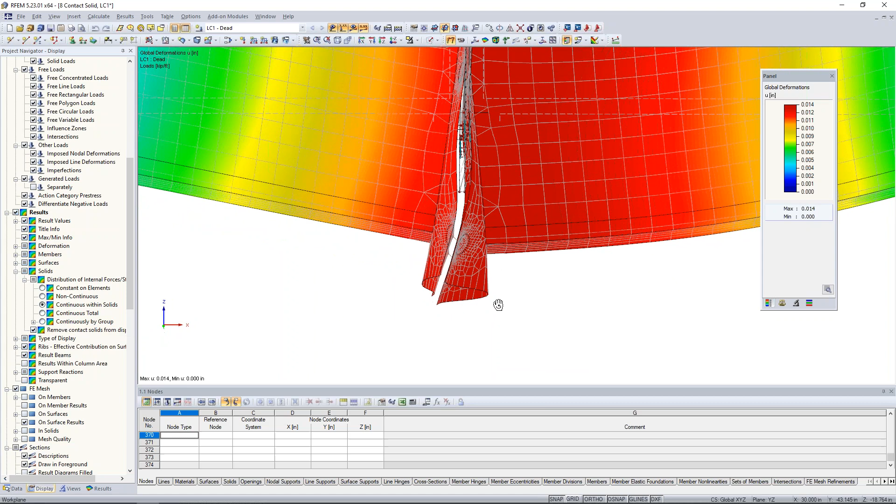So when we're looking at the deformation, it's quite apparent where our plates are failing in tension, and those bolt elements are holding those two elements together. But up at the top, where we have compression, we can see those plates acting together because they are working with full force transmission.

Under the results tab, we can expand the members option and view the tension forces as the normal axial load in these small bolt elements. As we'd expect, we have a higher tension load for those bolts at the bottom, and as we move up the plate, a much smaller tension load, if any.

Finally, we're probably also interested in the results on our surfaces. We could take one of these steel plates and create a visibility by the selected objects. We could view the von Mises stresses just to make sure we're not exceeding any of the yield stresses here, and we have the magnitude shown at 13.2 KSI. So that's pretty good for this connection.

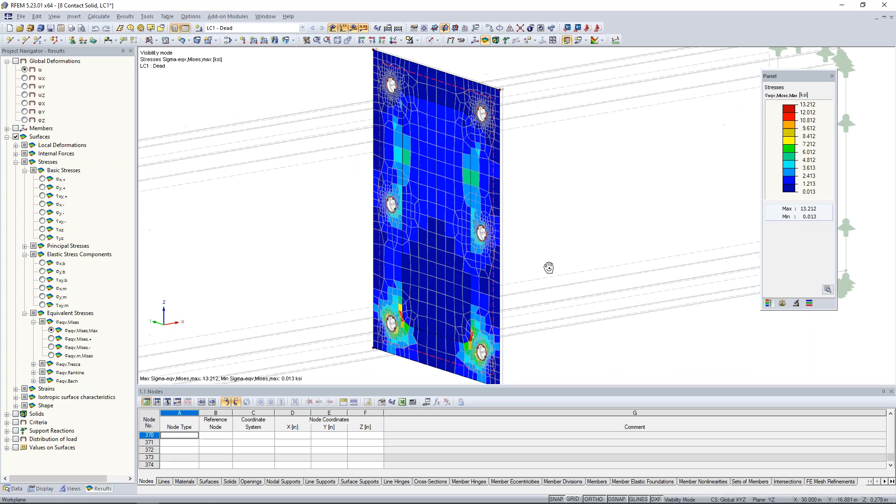We can also turn the model around to view the additional plate on the other side by selecting the visibility by selected objects. Slightly higher stress here at 15.44, but still relatively okay.